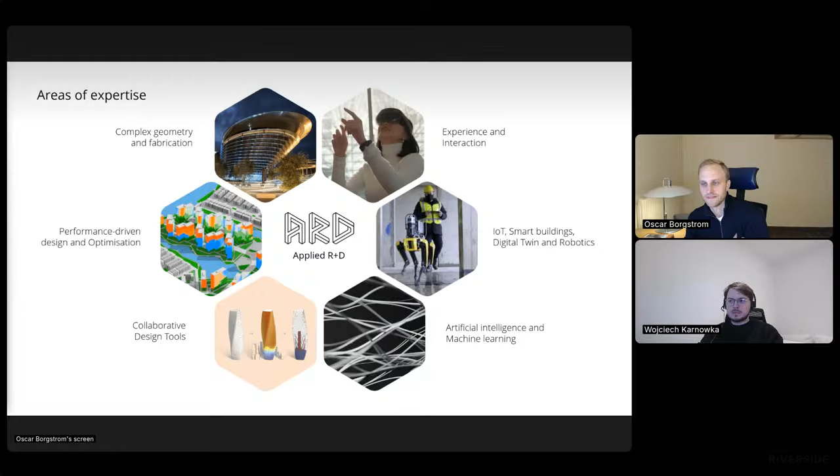So there's complex geometry and fabrication, which is the bread and butter of what we do. And then there's more experience and interaction and VR stuff. And then there's IoT and smart buildings, post-occupancy, digital twins, stuff like that. There's artificial intelligence and machine learning, obviously. There's collaborative design tools, but also how you make different groups collaborate better. And then there's the performance-driven design and optimization area. And that's the area in which Cyclops obviously sits. So there will be a lot of focus on measuring performance in relation to design.

Within this area, we have a few different tools. So traditional workflows usually involve a lot of stakeholders, and that can create quite delayed feedback loops when you're designing. And that is part of the reason why we develop these different tools, to basically shorten that time span, but also give more power to the designer so that they can develop this intuition of how their designs perform, and how they can make informed decisions quickly and effectively.

And while black box machine learning or AI models are all the rage these days, in some contexts like this one, fast and analytical and physics-based usually wins. Or I would say basically always wins, as long as they are within the relevant performance speed. Okay, I will hand over to Wojciech, who will talk a little bit more about the background of Cyclops.

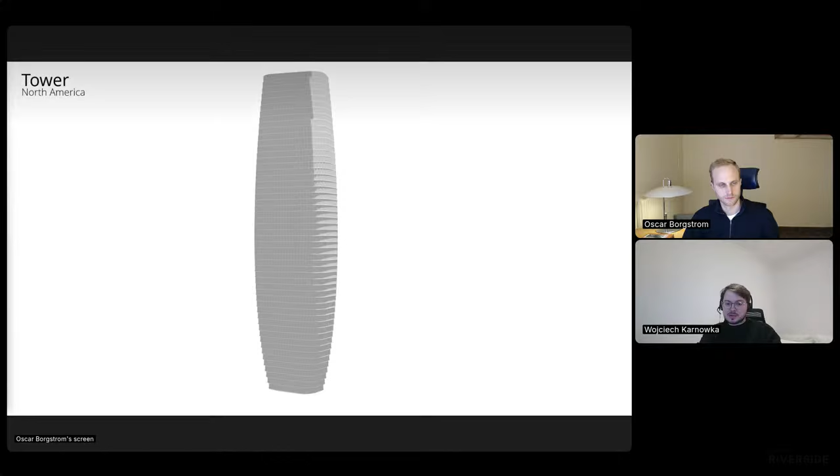We will start at the scale of the facade. Now, as you know, most of the work in our industry is confidential. So instead of showing you the actual project, we're bringing a kind of a dummy tower or generic tower to illustrate the process without showing too many details. Now we were asked to help and manage the direct irradiance on the facade. So we designed a system of horizontal and vertical shading louvers.

Now, traditionally, shading optimization relies on evolutionary algorithms or other heuristic methods. This is to reduce the computation time by just efficiently sampling the solution space. Now, with Cyclops, thanks to the speed and scalability that we already started talking about, we can just run a brute force evaluation of the entire solution space. So we test every combination of horizontal and vertical louvers per facade orientation for east, west, north, and south, and that's done on a laptop in 10 minutes.

Now, another not so specific building in Asia where we extensively used Cyclops for form finding at early design stage. We began by extruding the sides to the maximum buildable envelope, and that was 120 meters, and then we ran a sunlight obstruction analysis to assess the impact of this envelope on the adjacent school. The voxels with the greatest negative impact are then removed, and then we evaluate the impact of the resulting massing on nearby residential buildings. We again redistribute the voxels to minimize the view obstruction while maximizing our own views.

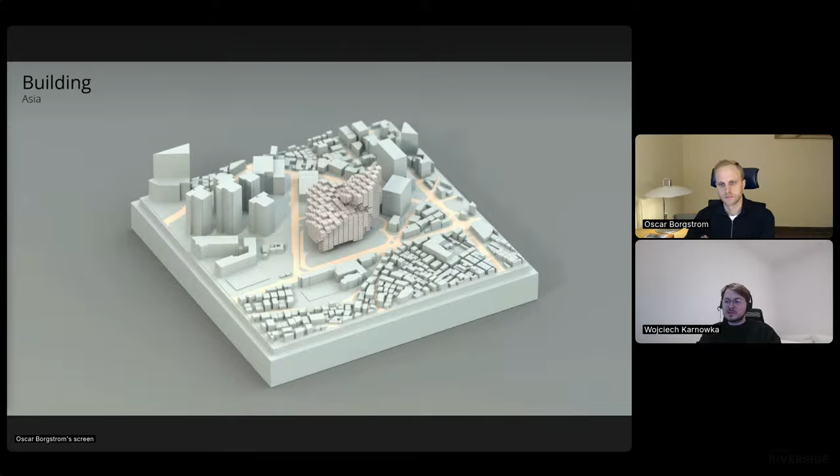So the voxelized shape can then be further rationalized for public space, for connectivity and internal daylight. And this becomes a sort of a reference for the envelope that the designer can then work with. Here you can see this envelope.

And finally, an example at the urban scale. This is a study for Guangming Hub in China, where the goal was to develop a layout that optimized for connectivity between the neighborhoods, views towards the central hill, daylight potential, and the total floor area. So we could have spent months creating and analyzing thousands of these options to find the best performing ones. But instead, we feed the requirements and the design rules to the computer and allow it to do the heavy lifting for us. The genetic algorithm generates and evaluates thousands of options and evolves the better performing ones.

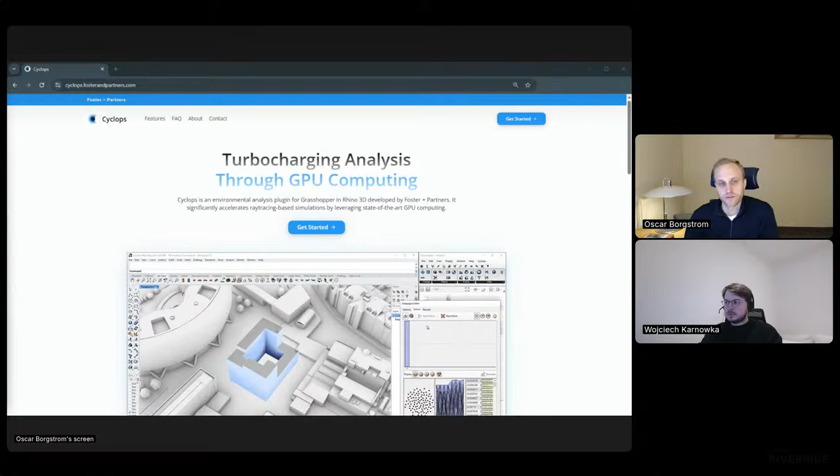The released package includes a few different features for things like radiation and daylight, sunlight hours, as well as some quite bespoke ones like the sunlight obstruction that Wojciech has been talking about. Cyclops is a Grasshopper plugin, and therefore it fits into most Grasshopper-based workflows. And it really brings this power of the GPU directly into the Grasshopper canvas.

So the benefits of using Cyclops are, obviously, as we described already, the speed at which it can run, but also the scale it can run. Not only the scale of the analyses, as in more samples, but also the scale of the context models that the software can handle. And then obviously this integration into Grasshopper, which allows for highly bespoke workflows that run analysis where the buildings often are designed.

So we'll take this one as an example. This is a real-time model in New York, where we're modifying a massing and updating the analysis for each frame, giving direct feedback on the performance. So each time you move this little arrow, the analysis recomputes.

To give some background on how this runs, the façade is sampled with an evenly distributed grid, totaling around 1,700 analysis points. Each point is then sampled 65,000 times across the dome, meaning that on every iteration we're tracing over 100 million rays, using a context model with over a million mesh faces. All of this runs at 40 milliseconds to give an update frequency of 25 frames per second, and thereby the real-time analysis, as you saw in that GIF.

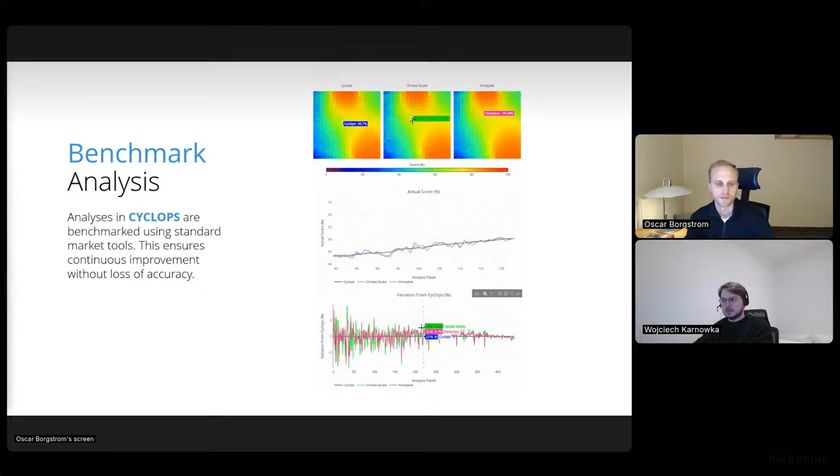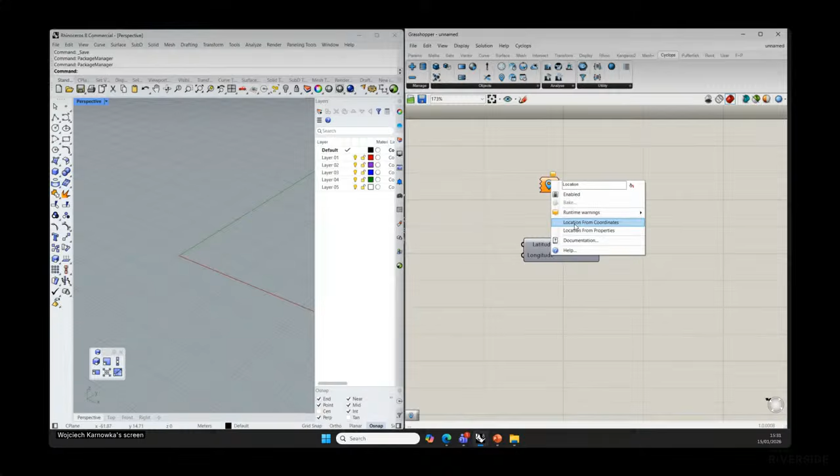So some of you might have been surprised, because usually when we pick a component in Grasshopper, we would just expect to see the component right away. Now, some of the components have multiple ways in which they can be created, for example, like this location component. So the first time you drop it on the canvas, you actually don't see any inputs or outputs. You would need to right click and then pick one of the methods in which that particular component can be created. And we will see in action how this is relevant with some of the analysis in a second. But this is just to explain if any of you get confused.

So that's our documentation. The next important aspect is the tutorial files item. So together with Cyclops, we ship a number of tutorial files that show how to use all the available analyses. So we have examples like cumulative radiation, daylight autonomy. We also explain some of the conventions, such as custom data or multiple scenes. Now we'll go through a lot of these principles throughout the workshop. But if you're interested, you can just have a look yourself and see the minimal viable setup that you need to have in order to run any of these analyses.

But as was mentioned at the beginning, today we will build the workflows from scratch. That also includes a little Rhino model that we will build, just to make sure that everyone is on the same page and that we can start from the basics. Is there anything, Oscar, that you think is worth adding before we start building? No, I mean, let's go. Let's go. Yeah. Okay. Cool.

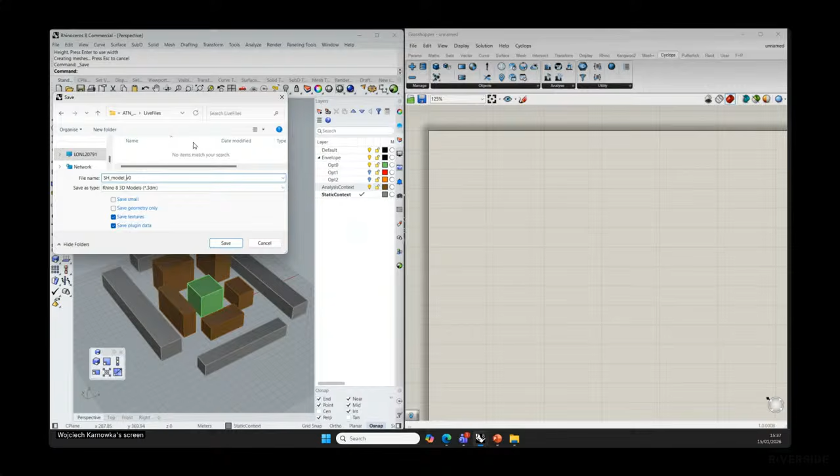So let's just make that a little bit darker, and maybe our analysis context can be just like that in this brown. Perfect. Okay, so these I believe are all the ingredients we need for the moment. So I will just save this file, and I will call it sunlight hours model, just to make sure we don't lose any progress. And I will also do the same here. Perfect.

So now I have an empty Grasshopper file, and the first thing we need to do is we need to reference some of this context so that we can get access to it. I will also use Bifocals. It's a plugin that, as we drop any of the components, since I'll be using icons, will give us a description of what the component is. Do I need anything else? I think this is a good place to start in Grasshopper.

So the first component that I will drop on the canvas that will do something is actually the Query Model Objects. This is the new component in Rhino 8 that allows us quite easily to reference active geometry from the Rhino document. For now, I will just reference the geometry that belongs to the envelope layer. I'm not going to get into the details. There's quite a lot of material online, but these new components have quite advanced filtering capabilities, so that we can extract exactly the geometry that's required.

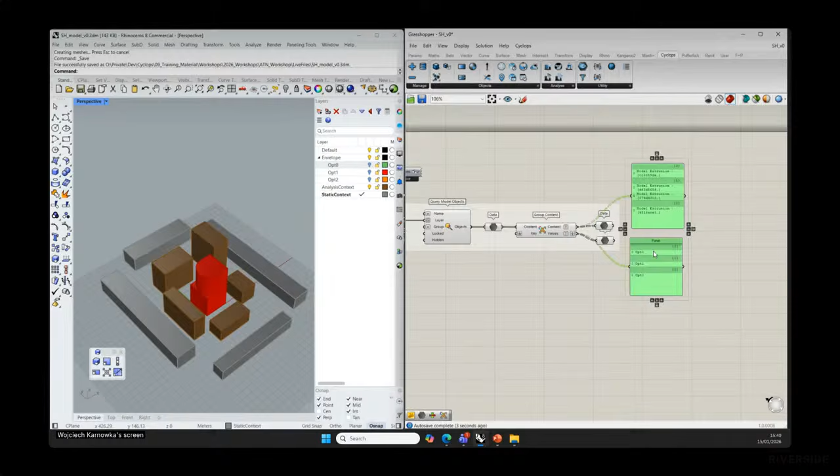What I also like to do to keep the scripts clean is keep them in separate groups so that we know that this is a distinct functionality. Now I will also do the same for the rest of the geometry. So we will do one for analysis context, and I will do one for the static context.

Perfect. So now I have my geometry reference, right? My static context, my active context or analysis context, and my proposed geometry. Fantastic. So let's just move it all to the side. And now let's start building on top of this.

As I said, we will run the sunlight hours analysis, but we will run the sunlight analysis not on our own proposed geometry, but actually on these adjacent buildings. This is to help us understand what is the impact of any of these massing forms on the adjacent buildings.

Okay, so the first thing we need to do is, since we already have the geometry reference, we need to subdivide this building into a grid of points, analysis points, that we will be able to test, right? So there's a million ways of doing it. I'm sure that if Oscar was running this part, he would have done that differently.

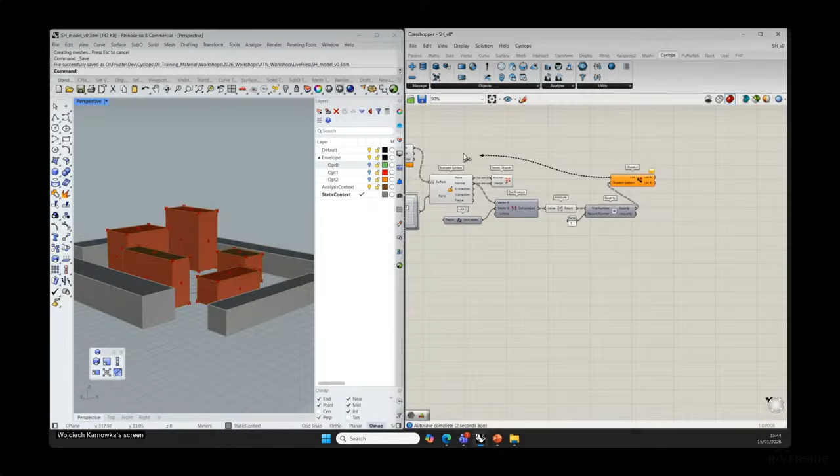So now I have access to my horizontal surfaces, but actually what I want are the vertical ones, right? So if I now hide all my geometry, and for the time being also hide all the geometry from Rhino, I have my vertical surfaces. This is a good start. Now we need to think about how we're going to subdivide them.

We don't really care about the data structure here, so we can just flatten the surfaces, and we can now start subdividing them, right? So we're going to start with a mesh surface component, which will allow us to take those faces and turn them into a mesh. If I now press Control M, I should be able to see the subdivision. So the default subdivision looks like that. As a default, it just hard codes constant U and V count. We don't want that, right?

We imagine this is a kind of proxy for some sort of a facade. So we want to now subdivide the facade into a number of panels. We can think of it as almost like maybe a curtain wall. So let's get the dimensions. First, let's get the division component, and we'll do that separately for U and V. And I will also get something like a slider between 0 and 12.

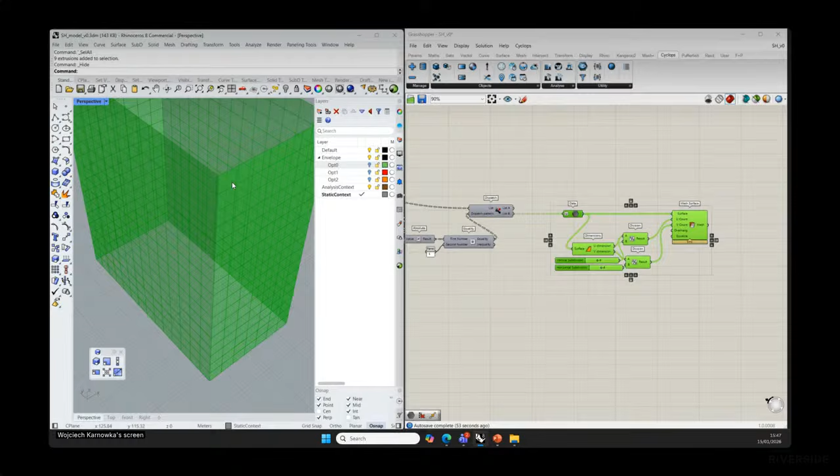Fantastic. Now, as I said, we'll be using the geometry of our adjacent buildings to run the analysis, and we will be using these panels to visualize our results and to define the position of our analysis points. That means we cannot simply draw the panels or sample the points exactly on the geometry, as geometrically it would be impossible to define, or the analysis point would be clashing with the geometry that we're using for the analysis. So we need to offset our analysis points, and the panels will be visualized slightly off the facade. So this is again something that you would have done a million times using Grasshopper.

I will just reuse the evaluate surface component. I will use the normal, but I will unitize it. And that means that now all my vectors are only 1 unit long, in this instance 1 meter long. And I will also multiply that vector by some very small amount. So I can, for example, do something like 5 centimeters. Okay, so now this is a vector that moves my base surfaces from the facade by 5 centimeters, right?

So I can take the original surfaces and move them just slightly away so that you can see the original geometry. So when we visualize our results and when we test our points, they're not directly on the surface, but actually slightly away. And this is a very common practice in environmental analysis, so it should be fairly easy for those of you that have run environmental analysis before.

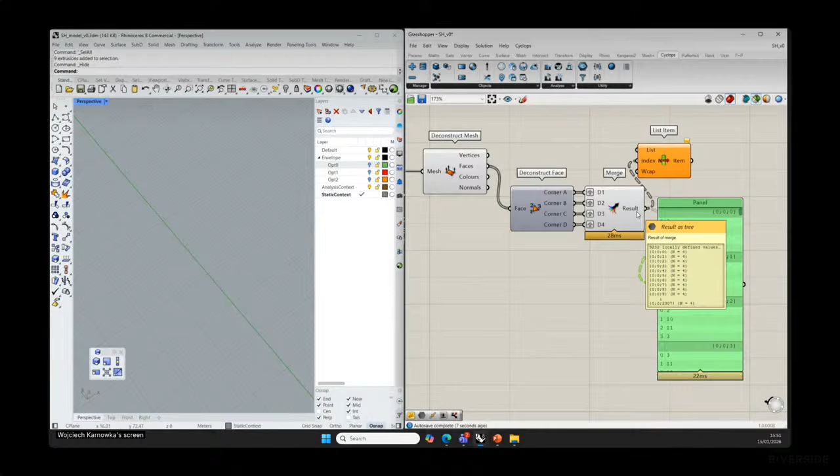show it. So here we are running the deconstruct faces. For each of the faces, we get the indices. Those indices, for example for item index 0, 0891, describe which of the vertices of the original mesh make up the face. So if I now go with list item, and I obviously have to graft my inputs, instead of a single flattened list I'll get a tree where each branch defines the indices of the original vertices that will make each of our individual meshes. So we now get a tree where each branch contains 4 points, because we're dealing with quads. The mesh is defined by four vertices.

Great. Now to build the actual mesh, we will need construct mesh. We know the vertices are in the correct order, so we only have to plug the selected vertices into construct mesh's vertices input. So to illustrate what we've done, instead of originally a joined mesh, we now have individual panels where each panel is really just a quad with 4 vertices. That's great. I can simplify my tree here.

Fantastic. Now let's try and extract the analysis point for each of the panels, so that we can define a point in which the analysis will be run or sampled. The first thing, we can maybe not even simplify, but just flatten, as we really just want access to each of these meshes. We can then use a face normals component, which gives us a center for each of the panels and also a normal. And we will also group it here and call it facade panels. So this is now the geometry that we can very easily visualize, for example, colors on.

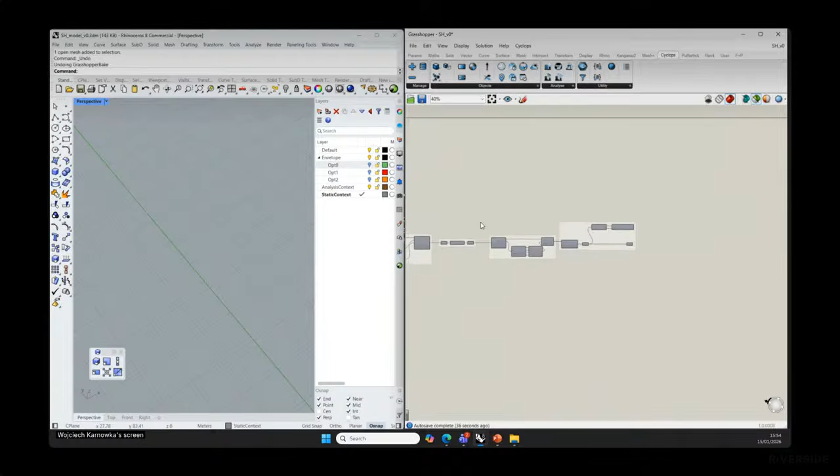So we now need to deal with the context that we left here. Maybe I'll move this to the bottom, and let's think about how can we bring this context and prepare it for analysis. So the first useful thing that Cyclops lets us do is this get clean mesh component. So this is a component that tries, with as little effort as possible, to create a clean mesh representation of the input geometry. So for BREPs and SubDs, it will try to get the display mesh that is already automatically generated by Rhino.

And this replaces the need of generating the new mesh every time the script runs. This will also help us when we have invalid meshes or nulls, just to make sure that we have a nice and clean mesh. Okay, so I can plug this get clean mesh into my static context, and I will also do the same for the proposed geometry. Now you can see here that this is actually the place where we care about the data structure, so I'm not going to flatten it. I'm just going to keep it as it is.

And now we will also need the geometry on which basis we build our analysis panels. We will also have to include it in the analysis. So I'll also get the clean mesh here, so that we can have this added. Now the Cyclops specific part, right? So in Cyclops, you can also read about this in documentation. We need to wrap the geometry into a geometry object, which is our basic primitive in the three-dimensional scene. And it wraps the data so that the rays in Cyclops can interact with it.

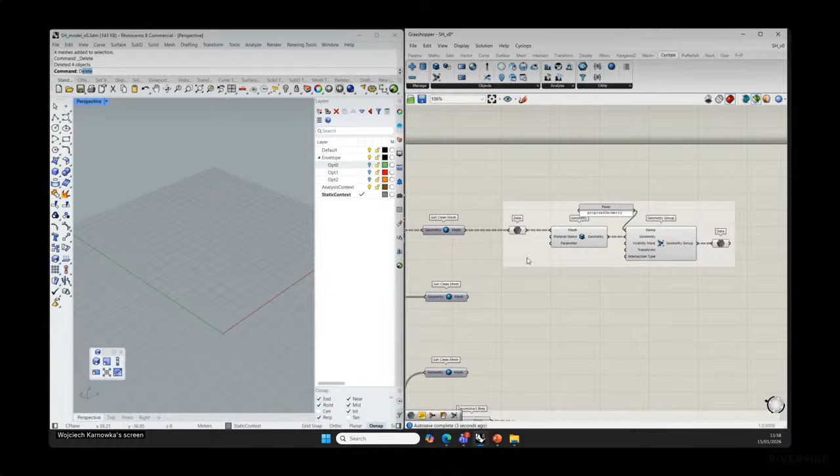Perfect. So this is our little component that turns our Rhino Grasshopper native geometry into Cyclops geometry, and I will copy and do exactly the same to the rest of the context. So here I will actually bring both of those together, and I will just plug the mesh. But as I said, let's be careful about the naming of our geometry groups, and I'll call this group context. Okay, fantastic. So we're getting there. We're not too far.

We now have the geometry and our analysis points, and now we need to look into the actual analysis. So here under Analyze, we can see the Sunlight Hours analysis, which is the component we'll be using today. Once I drop it on the canvas, we can see that there are still a couple of missing inputs that we will need to provide.

So first, I'd like to start by adding a Boolean toggle so that run is set to false. If I set it to true, I can see that we need some scene objects, or a scene, right? So first I'll drag these guys over so that it's easier to see, and I'll call this proposed geometry. And I'll drag these guys and call it context so that we know what's happening over here. Okay, perfect.

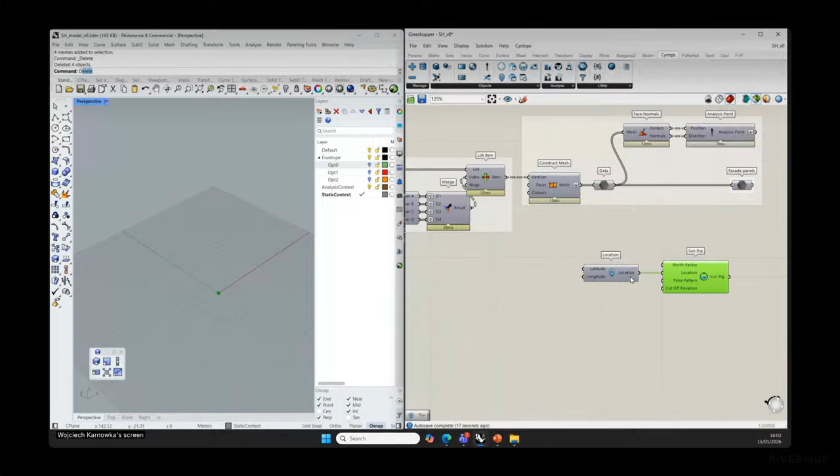As I said, we also need a time series or time pattern, which defines specific points in time throughout the year and is used to sample time-based data like weather when creating sky series. We'll look into that in a second. But to keep things simple, let's create a time pattern. There are a couple of ways to create it. We will use From Schedule, which lets us define the time pattern very simply for months and days.

We will run this analysis, to keep it simple, for the 21st of March. And we'll do it for, let's say, 10 hours. Oh, actually, instead of 10, let's do it for the entire day, so we have 24 hours in that time pattern. Perfect. So I will plug the time pattern into time pattern, and I've now created my Cyclops object.

It's called sunrig. This component already gives us a preview of the sunrig, but it's quite small, and we don't have access to any of the properties. So there's a second method, Sunrig Geometry, which I can use to preview and extract some of the geometry and parameters from the sunrig. If you're creating a diagram, for example, this is quite helpful. It's project and unit specific, but let's make it slightly bigger so that when previewing the mesh we can see what's happening.

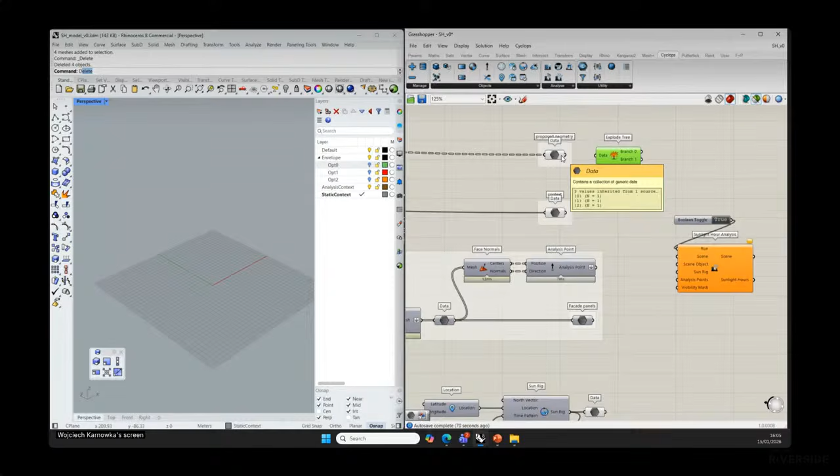So I believe we now have all the ingredients we need. The only problem, which we can skip for now, is that we have a single object as context, and this proposed geometry that has 3 different paths. But let's just try and see some geometry. I'll extract one of our proposed geometries, in this instance option 1, and plug it directly into our scene. I also need a sunrig and analysis points, and I also have to flatten the objects here.

So the analysis has run already. It took just 10 milliseconds, and you can see that for each of the analysis points we now have a value, the possible sunlight hours for each of these analysis points. So let's quickly, before we add any complexity, build a quick visualization pipeline so we can have our facade panels. We can do something like a gradient.

I would just use a gradient like that, and I can now use the sunlight hours results as a parameter. And just for the purposes of this, I know that this is a value somewhere between 0 and 12. So let's just set the upper value as 12, the lower value as 0.

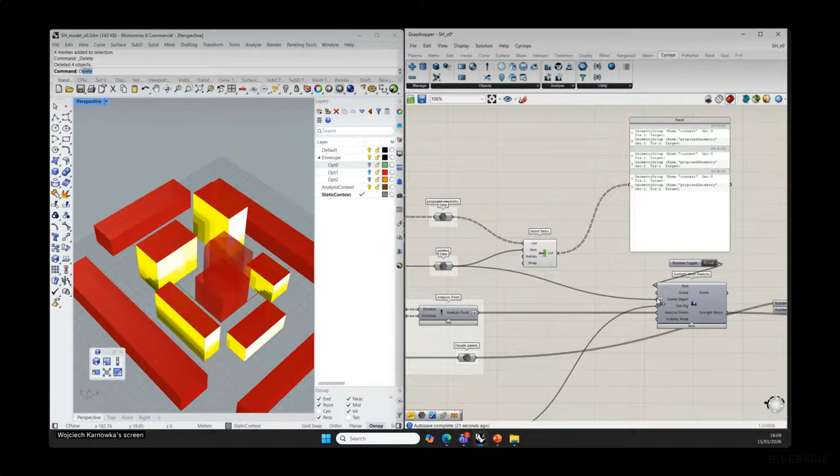Fantastic. So now instead of just picking one of the options and plugging the context separately, I can just plug an entire tree into the analysis, and I now get the results split into a tree. So if you remember, we've already showed it before. Each of these branches corresponds to one of those child layers.

That's fantastic. And now we will need to build a little bit more just to be able to distinguish between the options. So let's build something. There's again a million ways of doing that, but let's just do something like a tree statistics, so that we get access to all the paths that exist. I use the list item to pick up one of these paths, and I know it's 0 to 2. Okay, perfect. So now I just very simply extract the results for one of the paths. So this could be a path 0, 1, and 2. So very standard practice again.

Now I can just plug these results over here. It would be quite nice if I could see actually the massing that affects our adjacent buildings. So I can use the same path now, because I know that here at the very beginning we had a nice and clean mesh. So right now I'm just using the same path to pick the geometry, and I can see the preview of it as I go through my paths. That's great. Let's maybe build a little custom preview.

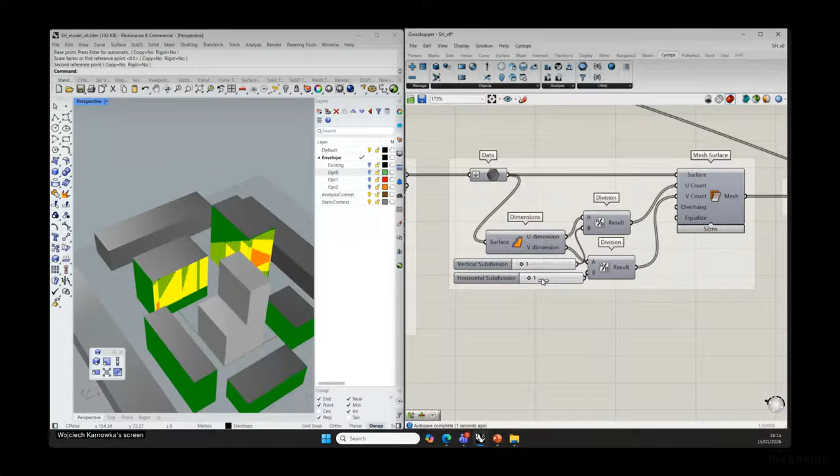Let's see if we could maybe get a higher density. Okay, maybe I went a little bit too far. Okay, but this should give us an idea of how we would find the differences in the impact between the massings. I think maybe this is a good place to pause. Oscar, is there anything you would like to add?

I mean, you can try and increase the subdivision of the time pattern just to show, because now you're just sampling once per hour, right? Right. Yep. Okay, perfect. Yes, let's do that. I will just make the grid a little bit larger. So let's come back to our original grid, and now we can. I haven't actually mentioned that. So here the number of time steps per hour, right?

So right now, in this period of 24 hours, we're sampling just 1 time per hour, but it could very well be, let's say, 4 times, 6 times, right? Yeah. So let's just come back. So now you can see that this gradient is a lot smoother. Yeah. Okay. It's another thing that I thought of.

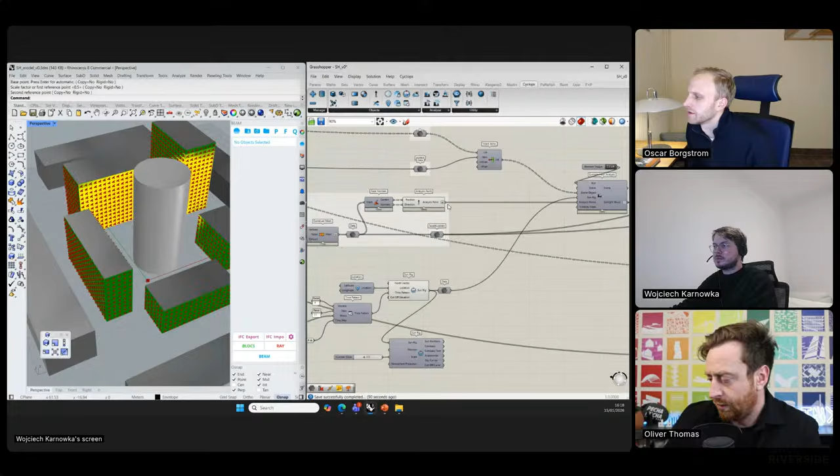There's a few quite high level ones. Some people at the beginning were asking, does this work in Rhino 6 and things like that. I think there's someone on a Mac that's asking, does it work in Parallels or whatever it is on a Mac? Some boilerplate questions like that. Yeah, I mean, so with Rhino 6, we haven't actually tried. I can't actually answer that. I would say you need to test, but we can't guarantee anything. People got to experiment and see what happens.

And it's actually the same with Parallels. We haven't tested with Parallels, but if you have an old MacBook, not with an M GPU, but with an NVIDIA GPU, then in Parallels you would have the NVIDIA driver. So potentially, because you would be running the Windows version of Rhino as well.

So yeah, it might work, but as I said, we haven't tested that, so I can't guarantee. It gets complicated, so you guys just got to test it and see what happens. The requirement comes from us using NVIDIA-specific libraries to do the ray tracing and use all the RTX hardware acceleration and everything. And that's why we need to be in that environment.

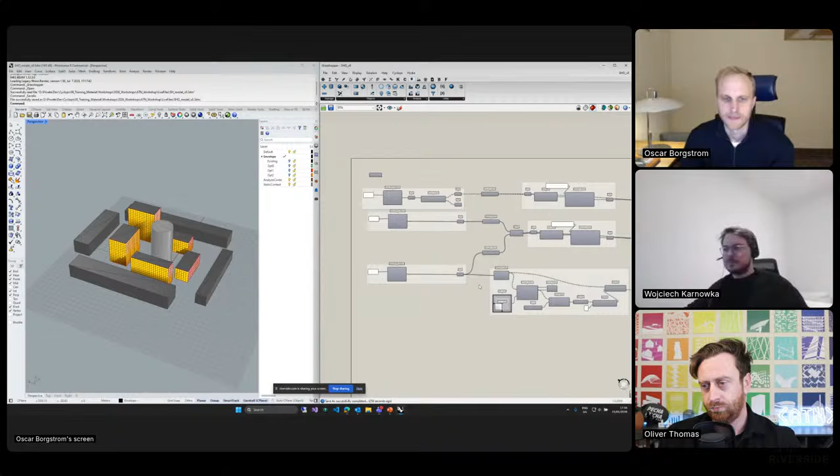Then this is obviously a bit involved because we're running analysis on the context rather than on the actual option, because we want to know how much the option impacts the context. Sometimes I guess you would run it on the actual option, but this is what we're showing here now.

We then subdivide the context into little panels, and we create these points on which we measure the amount of sunlight hours. We prepare the geometry for Cyclops, and then we decide what amount of time or when in the year and at which location we want to actually evaluate the sunlight. We run the analysis and we display the results. That's what we've done so far, and we measured the amount of sunlight hours on the facade of the context

buildings. Now we are going to go a bit deeper, and we're going to use a very bespoke Cyclops analysis called sunlight obstruction. And we're going to use it to basically evaluate which part of the option, so which part of the geometry that we're proposing for our development, has the highest impact.

I'll see if I can find this in the documentation. So if I go to analyze, this is a bit slow. Yeah, analyze and then sunlight obstruction. And so you can see an example where we're evaluating this neighboring building, just like we're doing here, and we're basically subdividing our option into voxels, and we're seeing which voxels have the biggest impact.

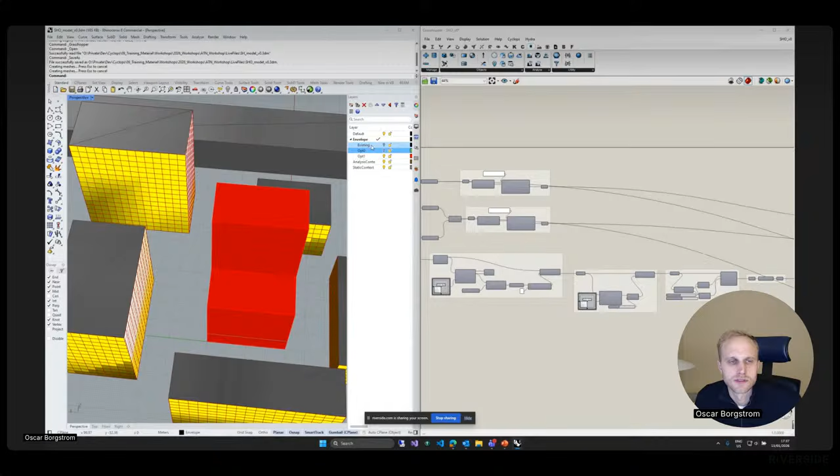So I will go here and delete option 2, delete option 0, and delete existing. Yeah, so we'll stick with this option. Okay, we still keep the analysis context because this is still the context that we want to evaluate. This is the context that we want to measure the impact upon.

Okay, and then we have the static context, which we're not using to analyze, but it is in the scene in such a way that it will impact the analysis. In this case, I guess it won't actually, because it's outside of the relevant geometry, but anyway, we keep it in there. So for this analysis, we keep the envelope here. Obviously, there is only one envelope, so it's not super relevant, but we're getting the meshes, which is relevant.

But now we want to voxelize this geometry, right? Because we want to have a way to see which part is impacting. The way the analysis works is that you have your analysis point, you check the direction to the sun, and you see, does this travel through any of the obstruction geometries that I have in my scene. So I'll use this model extrusion that we have. Let's maybe go here. I'm gonna just hide these.

Actually, we might do some cleanup here because we don't need all of this. We will need the sun rig. We will not need this analysis. Okay. And we won't be displaying any differences in this case. Okay, otherwise I think we can stay here to start with. So first off with the voxelization, this can probably be done in a lot of ways in different plugins, but I'll just show a way to do this in vanilla Grasshopper.

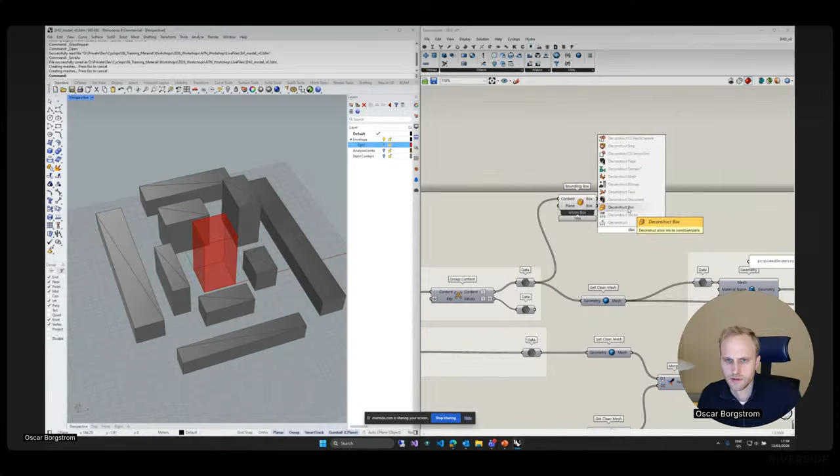So we'll do a bounding box of the geometry, and we'll do it as a union box. Okay, then we get the box properties. Oh, sorry. It's called deconstruct box. There you go. And we basically get the domain. So what we want to do is create little cubes or voxels, and we want to use the domains to create those voxels.

So we have the domains x 0 to 40, 0 to 40, 0 to 80 in Z. And then maybe in Z we can create a separate value for a grid. So we can use a grid of 9 meters maybe for the horizontal grid. And then vertical, maybe a reasonable height, 4 meters. Is that a reasonable floor height? Okay. And then we divide the domains.

So we want to split these into subdomains so that we can say the first voxel goes from 0 to 4, the second voxel goes from 4 to 8, and so on. An easy way to do that is to turn these into numbers. If you plug a domain into a number, it will give you the size of that domain. So if we do it for x to start with, we plug the number into A here, and because we have our horizontal grid, which is another number, we can call this division.

And the total size. Okay. That basically says here that we can fit 4.4. This is just approximate, so we'll just use that. So we turn that into an integer. We probably round down to 4. We have our domain, which is there actually. Can use that as an input instead. Domain. I'm just doing this so I can then cluster this and kind of copy it for the other domains as well.

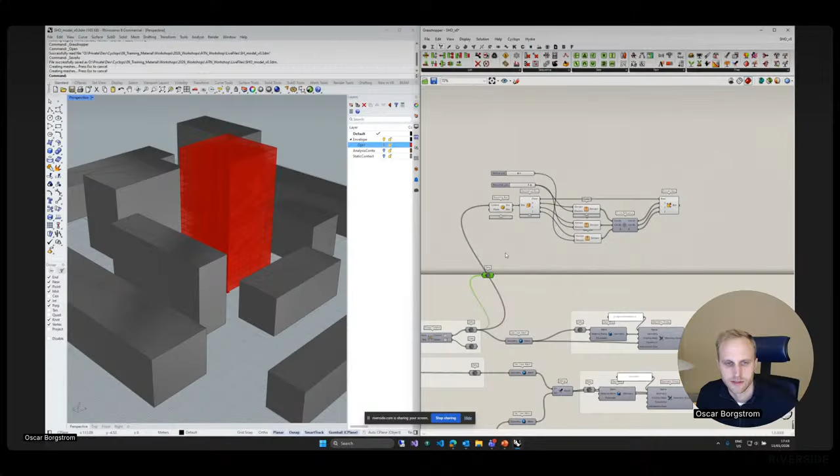So you can see here there is 0 to 10 and 0 to 10 continuously 320 times. We have 320 values for Y, and we have 320 values for Z. And now if I plug in list A, list B, and list C, I have filled my whole tower with boxes. Okay? Or my whole bounding box with boxes, rather. Then we can just use, because actually our geometry isn't that, right? It is a bit more advanced.

So let's check which of these are actually inside our massing. So I take the box, I just do one of these evaluate, which will give basically the center point of the bounding box. So I get the center point of each box. I go to analysis under surface and I just check point in B reps. I plug in my points, and here, right, I have my B reps. Okay, this just gives me a boolean if it's inside or not. I can dispatch my boxes with the inside, and then if you look at the data, you can see these are inside and these are outside, right? So we're only really interested in the boxes that are inside; this is like an approximation of our massing using boxes. Okay, hope that was clear.

Now we basically need to turn this into something called obstruction geometry in Cyclops. So I go under Cyclops here, and then I turn it into geometry. I plug it into a geometry group here, but then you see there's this thing called intersection type, and this basically decides if it's target or if it's obstruction. If it's target, we basically treat it as geometry which we want to count obstruction for, whereas if it's obstruction it is geometry which will be in the way, not transparent, so a sun ray will not be able to travel through it, and we won't be checking how much it actually impacts the analysis results. Okay, let's call this voxels.

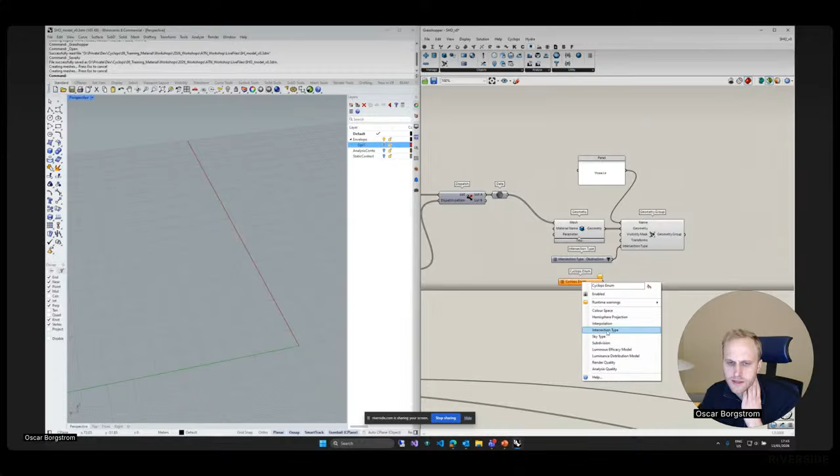There we go, and then this is now set to target, but for every one of these enum inputs, you can always right-click the component and click generate missing enum inputs, and that will basically give you the relevant enum. And here I can now change this to obstruction. You can do this in different ways. There is also the enum component, and this one lets you right-click and choose which type of enum you want to create. But that takes a bit more time, so it's very neat just to generate missing enum here. Okay, so that's the geometry group for the voxels.

We have the geometry group already for our context. Now we just need to make sure that the context is actually target intersection type, right? We won't be using the proposed geometry because that would obviously be in the way of our voxels. So I will basically just remove that, and we don't really want this stuff actually. Okay, sorry, I'll keep the context one, but I remove this, and we can copy this group. Can we do that? Yeah. And we can name that voxels.

Okay, and we plug in the geometry group with the voxels there. We don't want to see that geometry group. And we want to group the thing that voxelizes. Okay, seems like I have black instead of white. Let's just make it white instead. Cool, and group that. Okay, so we created our voxels.

I will actually delete this because we don't need it. And we don't need this mesh. Still need our context as we said. Okay, so now we go in here and we look at the sunlight obstruction analysis. Very similar to the sunlight analysis. Pretty much exactly the same inputs.

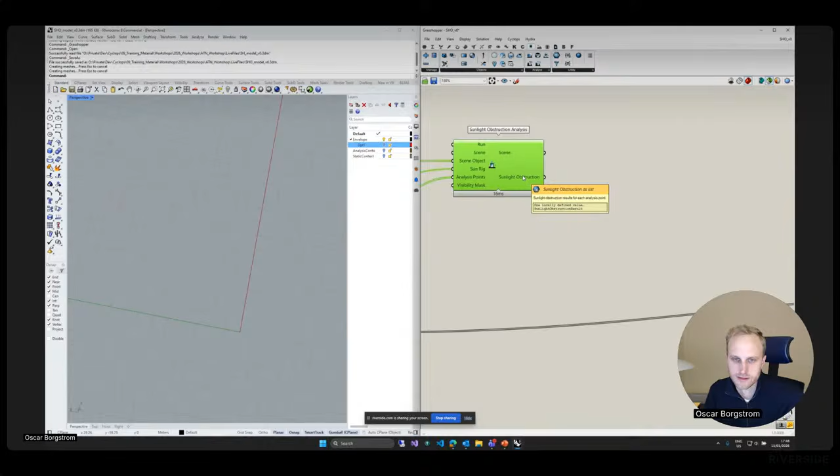So that runs. Wojciech likes to put in a toggle here. Usually you don't need to, because usually the analysis is not actually the thing that takes the most time in the script, but as safety we can do that. Okay, and then you see we just get one object, sunlight obstruction result. And that is because these results are a little bit more complicated, so it's a bit hard to just flush them out in a data tree or in a list.

So instead, when we get an object like this, we need to use the component called filter results up here. So I'll drop that, and you can right click this and choose sunlight obstruction result. This is because in other versions of the plugin, there are more types of these results. But anyway, if I plug in now sunlight obstruction results here, you can see that it kind of changes. And now it allows me to basically choose which geometry group do I want to get the sunlight obstruction results for. Right, so I created one geometry group up here with the voxels called voxels.

But I could have another geometry group in the scene as well, measure the obstruction for that geometry group, and that way I can basically filter using this component which geometry group do I want the results for. But obviously now there's only one, so if I click add here, this works similarly to the enum. It will create that input. And you can see in this drop-down, voxels is the only option I can choose from.

And now the output will be the amount of hours total that each voxel obstructs sunlight hours. Okay, just to sanity check, 240 voxels, and it will be in the order that the list is obviously plugged in here. Right, for the first geometry here, you will have the first result here. Okay.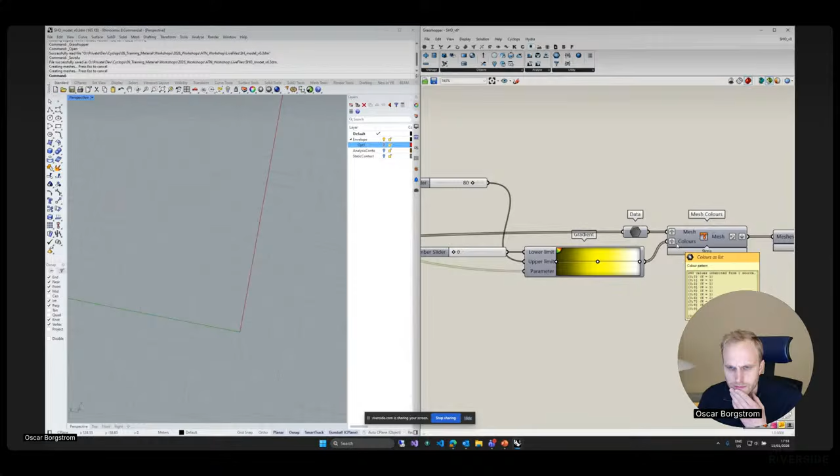And let's reuse some of Wojciech's analysis here, or display rather. We can just get the bounds here just to see. So the maximum is 80. I'll just plug in an 80 then to the upper limit. Okay, we're not going to do it per option here. Okay, so we plug in that, and then we're getting 240 colors, right? Because we have 240 voxels.

And now we don't really want to display this on the facade. We want to display this on the voxels, which we have up here. So we pull those down, and we plug those in here. And then we turn this off. And now we can see the voxels, right? And we can see basically, which is, I guess, naturally the ones that are kind of closest to the facades have the highest impact.

If I preview this, you kind of get the sun path in relation to that, and you can see that. Obviously, if the sun is coming from here, these geometries won't really shade much, because the sun that goes through those geometries will just hit the ground, while the geometries up here obviously shade like this geometry, right? It shades probably for the facade behind there from this sun position, but it also shades the facade here from this sun position, right? So they have a big impact, the ones that are white here. But actually, maybe it makes sense to just create the preset, which is green to red. Okay.

Then as a little filter here, you could maybe have a specific GFA that you're kind of allowed to build, as an example. So then we could maybe do a sort, and we could sort our voxels by the score that the voxel has. And then we know that the voxel here is now 9. We can actually take that number down.

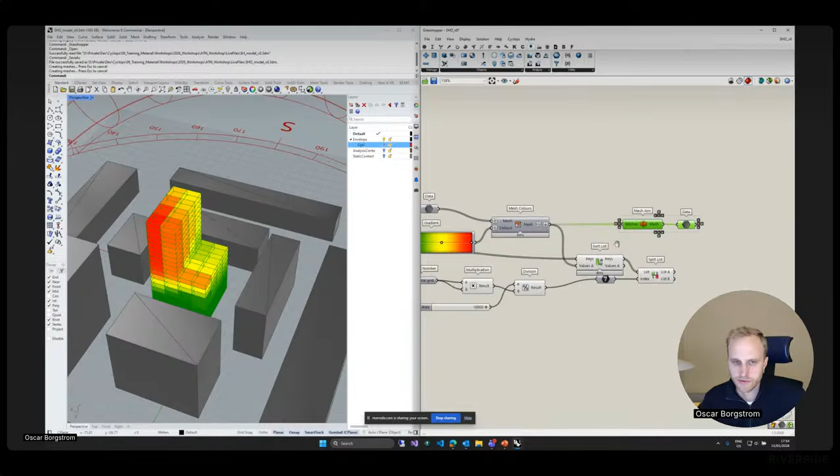Okay, and if we actually then just plug those, oh sorry, I plugged in the keys. We obviously want the values because they are the voxels, and they are already colored. So we just plug that in there. We preview off from this, preview off from this. We actually want list A, right, because we want the ones below. There we go.

Maybe I can set this to 20, sorry. Okay. Now we can kind of filter out how many voxels we want to be displaying or want to use. Obviously, it creates a bit of a gap, so this, as we've said before, is just kind of a guidance on how many voxels you should use.

We can see what happens then if, just as a test, I create a time pattern again. Instead of doing it for a specific day, maybe I want to check the whole year. That will obviously create a sun position for the whole year, right? And now 80 doesn't make sense. Let's get the bounds again just to see what the max is, 21,000. Actually, I'm just gonna deconstruct that domain and just make the display dynamic. Okay.

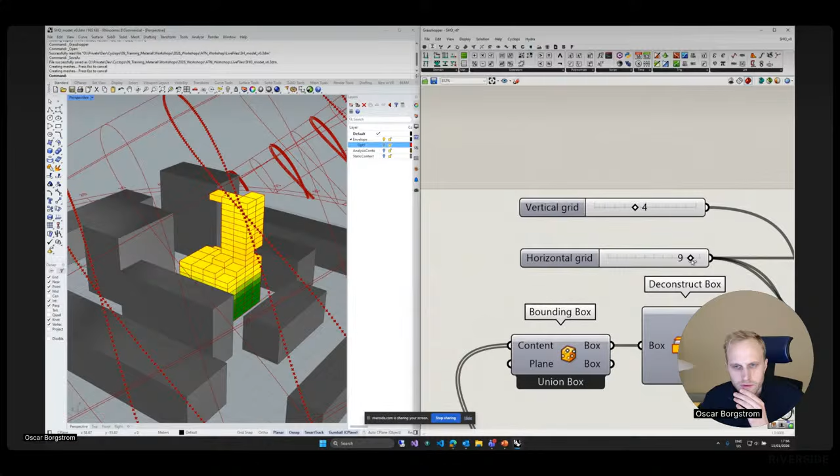So now we're using the impact of the whole year instead. Creates a bit of a funny look here, but that's usually the case. This is guidance, as I said. Okay, I hope that was clear. I can also divide this into something smaller just to show some more performance.

So now still the analysis runs on my laptop here with an A4000 GPU, I think, for 2,600 voxels and 4,400 sunlight hours, 2,300 points that we're checking against. Yeah, I hope that was kind of clear.

Let's see if there's any concepts we can maybe talk about. So we talked about those, we talked about that. So there's one thing called custom data and get property value, which can be quite interesting. So on each Cyclops object, we basically attach a dictionary that can hold custom data. And that allows you to basically send information with Cyclops objects.

It's similar to what's now been introduced in Rhino, where you can apply key value pairs, and in Rhino you can also filter by key value pairs. You can use that to basically get and set custom data on an object. So if I put this here, you can see I input a Cyclops object, which is, for example, my geometry group, right? And I say the name of the key. What can we attach here?

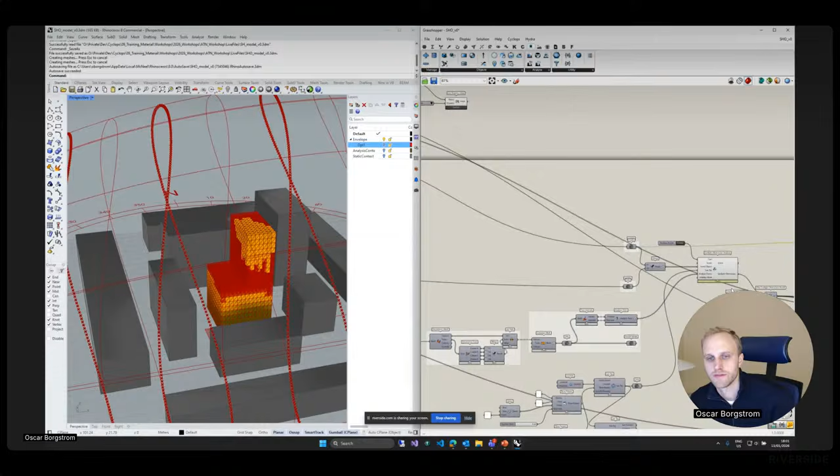This is maybe not the most efficient way to do this, or the best example of where this is useful, but still this is a way to retrieve the data that you have inputted somewhere else in the script. So here I now have my meshes for my voxels, right? And if I flatten this, I can obviously use it here. Preview. And I get the same thing. And I didn't need to output the boxes up here.

Okay, we'll wait a little bit with the scenes. Let's see if there's anything down here which would be good to go through. So yeah, we can go through the time patterns. There's quite a few ways to create these, and quite a few more ways of creating time patterns will be released in the next version. But by default, it creates sampling within the hour.

Does that make sense? So what you see here, this one is not the one we're displaying, this one, right? Here we have a sampling of once per hour, meaning that if you want to evaluate how many hours you're getting sunlight between 12 and 2, let's say, you need to have 2 samples because you have 2 hours that you're covering. So then we sample at 12:30 and 1:30. It wouldn't really make sense to sample at 12 and 1 because that would not be an accurate representation of the time between 12 and 2. So that's why you're seeing these samples every half an hour.

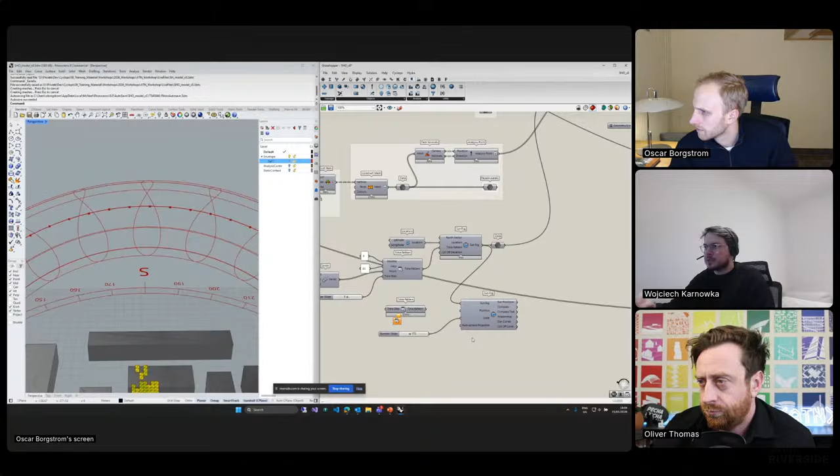Okay, I think we're kind of finished here, and we can jump into some radiation. I think, Oscar, if you want to do the scene now, because we will have to use it in the radiation. I can go for it as well, but okay, sure, you're describing some of this, yeah, do that. Yeah.

Okay, so in this, it's almost better to do it actually in the previous script. Mm-hmm. Don't you think? I will save this and save this.

Sorry, I'm working from a server, so it's a little bit slow. Or it's very slow. Maybe it's the streaming that takes all the time.

There we go. Okay, file. We go back to the sunlight.

And here we go back to the sunlight. Okay, so now we're back in the sunlight hour script. And as Wojciech did before, he basically created a branch for each option, and then he inserts the context, right? Because this runs by branch. So for each branch, we run an analysis, and each time we basically upload all the geometry to the GPU, we run the analysis, and then we remove everything.

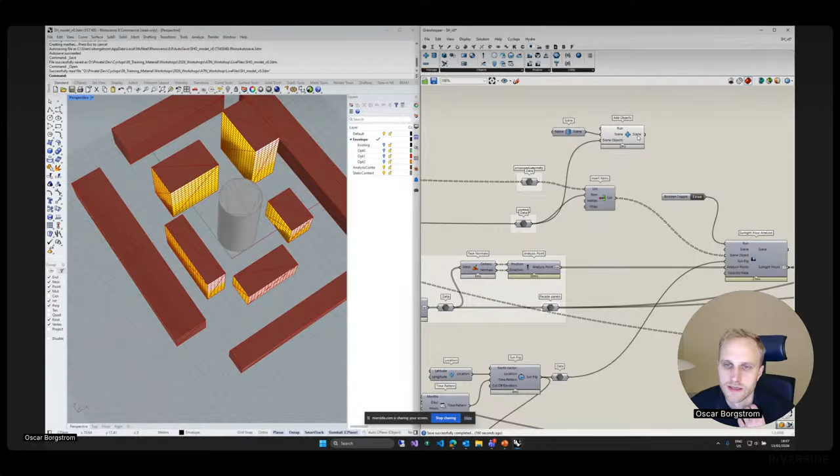And the scene, you basically create one by dropping the scene component on the canvas, okay? And this has now created basically a static state on the GPU onto which we can add things, remove things, and run analysis, okay? And then I can use an add object onto the scene. So I take the scene, and now what is static is my context, so I plug that in here. So now I have a scene that contains only the context.

And now I can run analysis on the scene, and I don't really need to then input the context again to that scene, right? So I basically delete this component, and then I will plug in the proposed geometry in my scene objects and the scene into the scene. Okay. It sounds maybe very clear. I hope so. It can get very complicated.

Oscar, you can also just show how in the same scene we can run multiple geometry groups and kind of how that relates to their names. Yeah. So what Wojciech was pointing out before, it's very important to name your geometry groups, because now instead of removing the scene between each analysis, we're actually keeping the same scene. We're basically adding new scene objects, right?

So for each branch here, we keep the scene static, and when we run the first branch, we add the things in the first branch to the scene, we run the analysis. And the things in the first branch will stay in the scene forever if they're not replaced or removed, right? So because we're creating here 4 different geometry groups, they all have the same name, and the name, as Wojciech said, is the unique identifier. So if you add a new geometry group to a scene which has the same name as one that already exists, it will replace it.

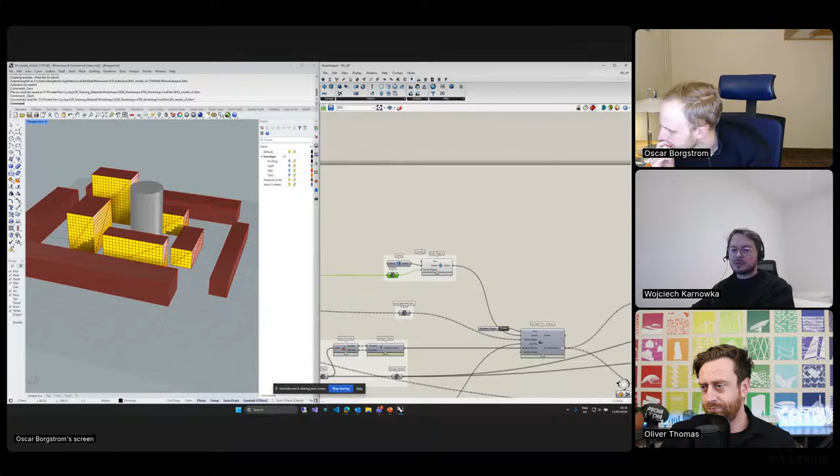So this is the example that we would normally run in a loop. I don't know if Oscar, you want to talk about it, but basically at each iteration stage, you would have to be adding just one voxel. Right. Yes, we've done a few analyses like this before, where you kind of step in a way. I don't have that open anymore, but you basically create one voxel, and then you evaluate, and then you make that opaque, right?

It's not transparent anymore, and then you check, okay, of all the voxels that are on the same plane or possible to add, just stepping upwards, where should I add a new voxel in order to increase the obstruction? Yeah. It's very hard to actually explain this workflow, but there are iterative ways to kind of add voxels, because the problem here is that the voxels are transparent, right?

So a sun ray will affect all the voxels that it travels through. And that's why we're getting these kind of strange shapes, and sometimes there might be a voxel in the center that impacts the most because it sits in such a way that sunlight from a lot of directions travels through it. It doesn't mean that removing that voxel will remove the impact, because there might be other voxels that also shade the same sunlight, if that makes sense.

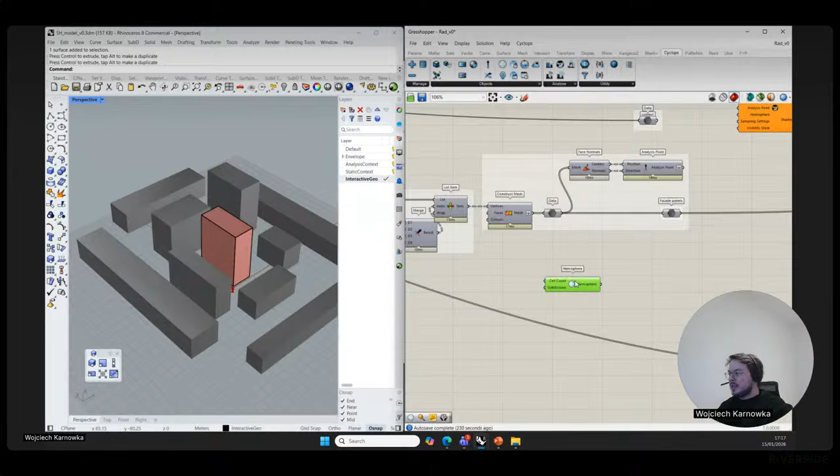And again, similar to Sunrig, we have two ways of creating it. We have the hemisphere and hemisphere mesh. Let's start with the hemisphere. And now, as I said, depending on the size of the plane, we can see its representation. Maybe just to make it a bit easier for us, I will immediately also bring up the hemisphere mesh so that we can scale it. We could do that with the plane, but because we're working with quite a big model, I just find it easier to scale this way.

Okay, amazing. So the hemisphere describes the subdivision of the dome into discrete patches, and it requires us to define a cell count and the type of subdivision. For the cell count, it's just a target number of cells that the dome should be subdivided into. And then the subdivision is, again, an enumerator. Quite common in environmental analysis is using the Reinhart-Tregenza sky division.

If we're interested in what any of that means, we can again go into the documentation. So in this instance, let's just go to the documentation here. Hemisphere. Okay, perfect. So for example, the Reinhart-Tregenza is a standard based on the subdivision of 145 cells. But there are also others depending on our use case, and you're welcome to come in here and read about the differences and advantages of using any of those.

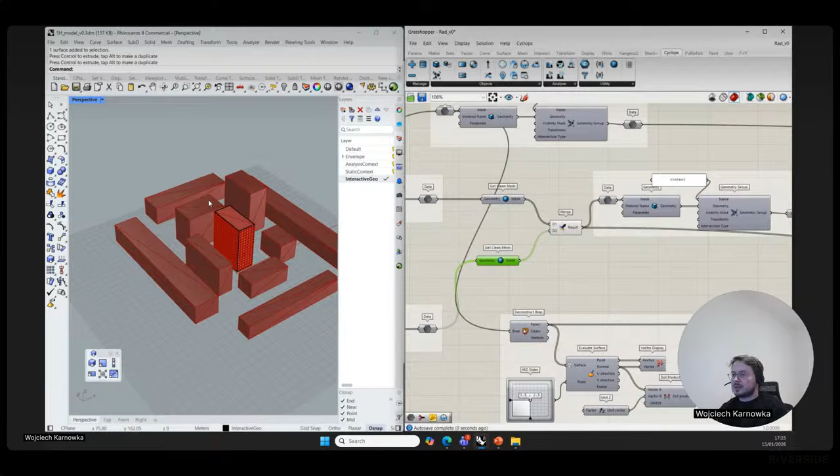We obviously also need the analysis points. Perfect. With the only difference that I am still using, as previously, the sampling on the context, but this time we will be running the radiation actually on our active geometry. So let me just disconnect the sampling of the facade from the context and instead plug our mesh, right? So now you can see we're sampling the mesh, and we have our analysis points here on the interactive geometry. So as I change the geometry, the process reruns.

Okay, so let's see. So here is our shading mask, and perhaps we can see how one would visualize the shading mask maybe in a second. But first, let's just try and fill the rest. So for the radiation analysis, we're going to need the shading masks. So again, you would expect here as many shading masks as you have analysis points. We had 646, and the sky series can be directly plugged. Let's in a second visualize what those shading masks mean. But for now, just to finish this part, let's visualize the cumulative radiation.

So again, the visualization pipeline is quite simple. We just take the panels, and we can directly just plug them as they are. But actually, the parameters that we visualize by will be something like bounds from the domain, start, and end. But now let's use something appropriate for radiation. So we obviously have it reversed now, so we want actually the red to be where the radiation is high. So just to make it simple, I would just reverse the start, right? So we have our domain ranging from 400 to about 1,000 kilowatt hours per square meter, and we visualize it quite easily. Okay, perfect.

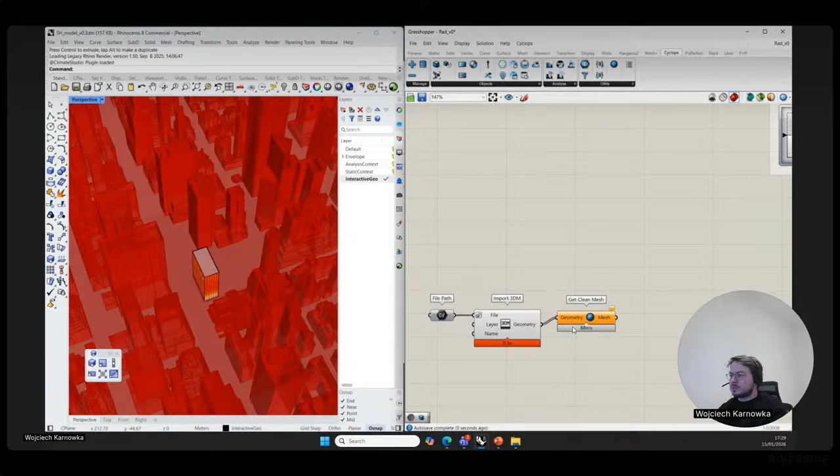So it's a good habit to have, just to use the get clean mesh component that we started with. This model might not be very clean. There were a lot of meshes cut and removed, so there might be some zero area triangles and so on. So for the purposes of this exercise, I can just ignore the warning for some missing or invalid meshes, and instead I can just join the mesh. Okay, so let's visualize it and just use it as it is. Right now, it's a fairly big mesh. It's 400,000 faces, just slightly over that. So let's see how our models will perform now.

We know that if we're inputting a large and complex context, we only have to do it once because we're taking advantage of this add object to scene method, right? So let's start with that. I will obviously need to pass it here. So instead of using our reference context, we can just maybe visualize right away, and I will just pause the analysis.

So yes. So if I now plug the geometry directly, okay, we can see that the geometry is now in the document, and it's already probably here in the scene. It is added here to the scene. It took just 90 milliseconds, and now I can run the same analysis.

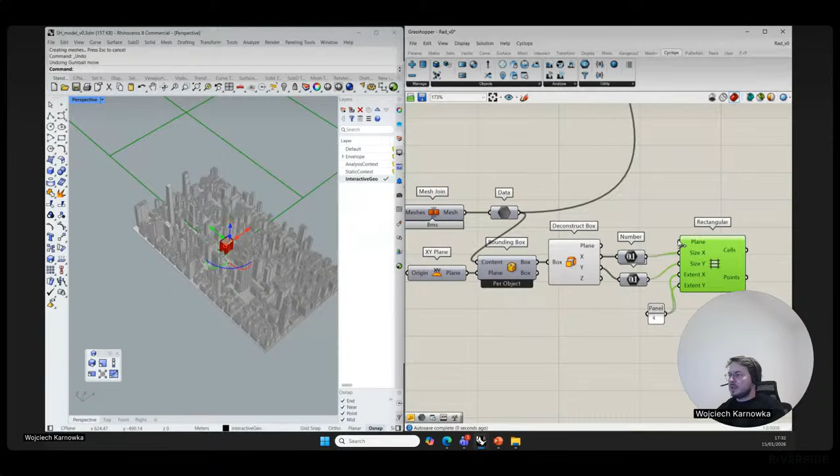I just want to show that we could potentially take this kind of already large model. We could again use the domain, just to understand what is the size of our bounding box, and now we can copy it a couple more times. So if I just take one of these components, a rectangular grid of this size, and let's not go too far, but if we just have 16 of those, that should give us some preview. So now I could just use move component and use the flatten points.

So I would expect the copying actually takes a little bit of time, but let's see if we can get this geometry in. Okay, so it will obviously be much better if I join this mesh. And then I have actually realized that the reason why it's taking quite a lot of time is because I'm using this custom preview component, and it would be much better if I just used, I think, mesh color.

Okay. So here we go. Let's see what happens. I might have gone a little bit too far with the 16 versions of it, but let's see. Okay, perfect. So you can see that now it took quite a bit longer, but the geometry is now in the scene, and maybe we can preview it. Oh, so this is my bad because I joined the mesh. It's actually invalid, so I might have to just send them separately.

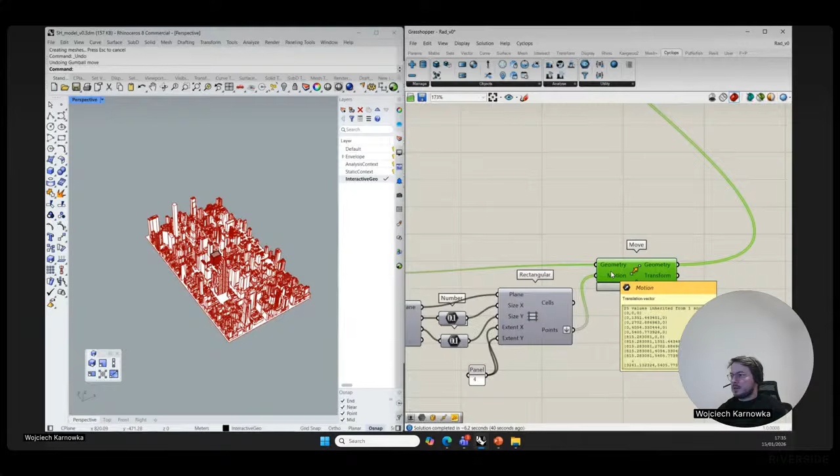Apologies. Yeah, okay. So now, since we're just visualizing the mesh colors, we cannot obviously see the shading right away, but you can see that the... okay. I might be doing something wrong here. Just 1 second, just to debug this. I'm not sure if this is something to do with how this mesh gets mutated after it's moved, but once it's moved, it seems to be made invalid. Just give it another try. I'm not too sure why on this multiplication the mesh gets broken for this fragment of the city.

But for the purposes of this exercise, let's stick with the mesh here and the preview. Once running this radiation, even with about 400,000 meshes, the model still remains smooth. I don't know if there's anything else that we could show here, Oscar. I could potentially go through the shading mask visualization, unless you want to go through this with your next example.

I think on your test there, just as a quick test, see if you can plug in your invalid mesh into the get clean mesh component, just to see what happens. Yeah, let's just make it a bit smaller, just to see what's going on. It might take a bit of time now because it's trying to clean up the mesh. Maybe it doesn't work. There we go. Okay, perfect. Thanks, Oscar. That's great. So let's see if we can just run this analysis, and there we go.

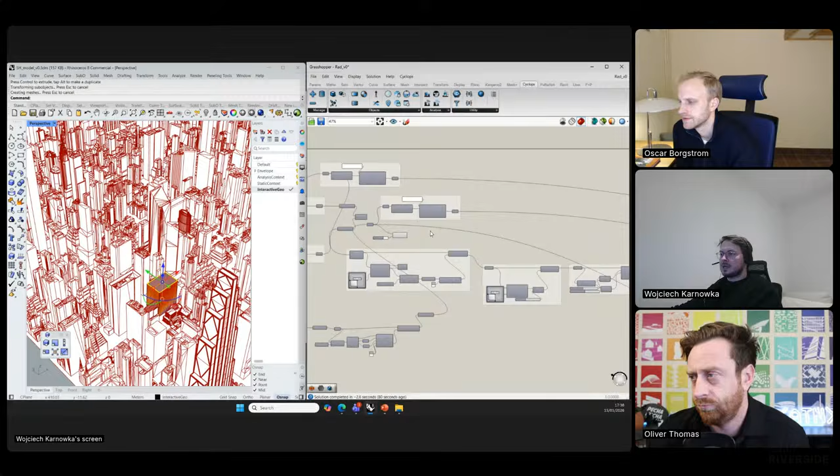I guess you can briefly talk about the fact that you can actually input the transform straight to the geometry group instead. Okay, right. Yeah. So the geometry group component also has this idea of the transforms. So you can see that here I really wanted just to show how do we copy the geometry, just to show how much of it can we actually input.

But quite often, if we're dealing with something like trees or cars or buildings that are just being repeated, similarly like in rendering, we use instances. So we could in Cyclops. So right now, if we just came back to the previous example, we could actually, I believe, use the same points, but instead now of moving the actual geometry, we could use this transform list to actually transform the content directly in the geometry group. And that process would then be much faster.

And again, the preview of the mesh will take most time, but you can see that in case you have some repetitive geometry, you can just make use of these transforms, which is in an intuitive way exactly like instancing of geometry in your rendering software. If you use Rhino a lot, you can very much see the geometry group as a block, right? If you create a block, you copy the block around, you're not going to create new geometry, you just create another instance with the transform. Yep. Okay.

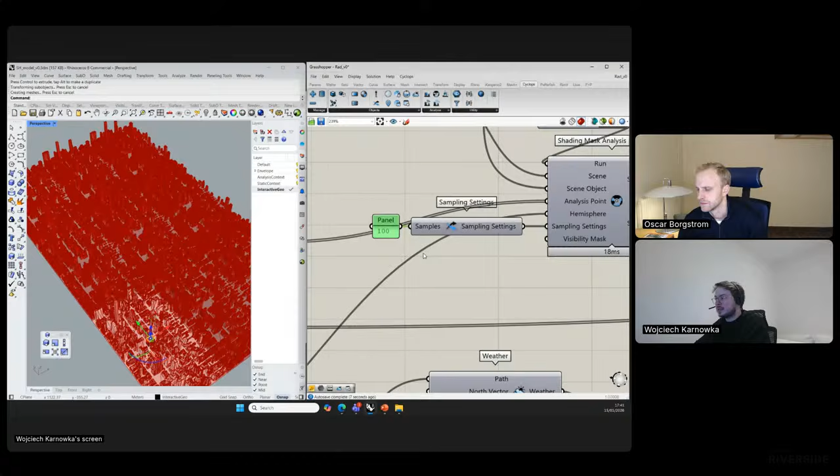Okay, so the number of samples here specifies the side length of the grid within which the randomly sampled rays are cast, right? So if we, for example, plug in 100, the actual number of rays cast will be 10,000. In this instance, we're only interested in the direct irradiance, so we shouldn't really set the bounces, as we're not really interested in the interaction between, for example, the materials and their properties or the transparency of objects. Yeah.

Cool. Okay. Any questions we should pick up? Yeah, there's not so many questions, more compliments. People are saying this is going to be super useful, particularly on massive urban projects. People are going to be jumping into this over the weekend.

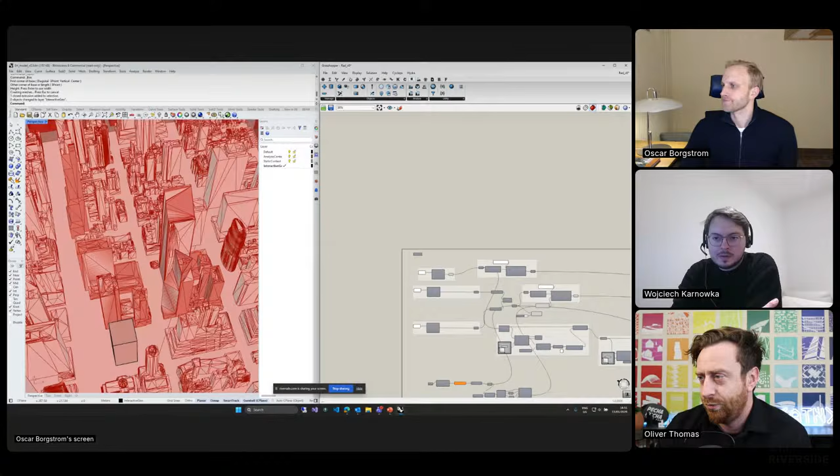So now we will jump into some daylight. It will get a little bit more complicated. I'm just setting up my screens here. Because now we start talking about sampling even more and materials and some things like that.

But I'm here again starting from the script that Wojciech had. We might as well keep this context, I think. There's no point in going back to the boring old cubes. But we can maybe remove this unnecessary copy that was just for illustration. So I'll remove that. I'll remove this display because I think Wojciech already created a display down here.

Okay, and I don't remember what shortcut he had for this. So Control M, preview mesh edges. You don't need to do that. Okay, this was a bit dark. So let's see. Okay, so we have the interactive geometry. Now we're going to run a daylight analysis. I'm going to run it on kind of a floor plate. So we're going to use a horizontal subdivision instead of a vertical.

We're keeping this. Actually, we can just delete these layers. Yes to all. We don't need this stuff anymore. As Wojciech said before, this join is really just for visualization in Rhino, and from Grasshopper into Rhino it's always much faster when you have fewer instances of meshes. So it can be quite efficient to join them. Okay, so we have the context and we have our interactive geometry.

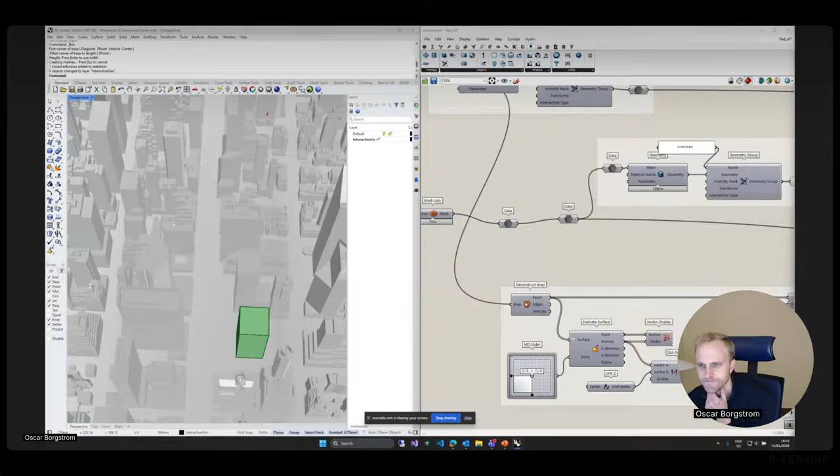Now let's start with creating some kind of, I don't know, some kind of floor plate here. Right? Okay. So first, we basically will want to create windows on the facade of this. So I'll take the, let's see, how should we do this? Okay, we can create a floor that we can kind of move up and down. Maybe that's the easiest actually.

Okay, I'll just create a bounding box here. This thing, that's my geometry, right? Maybe I'll just move all of this stuff down a bit because now they're working in the top here. Okay. Create the bounding box, and then we deconstruct that box. Okay, we get the Z properties of that, and we'll basically try and divide this into floor plates, to floors. Okay, so we plug this in here.

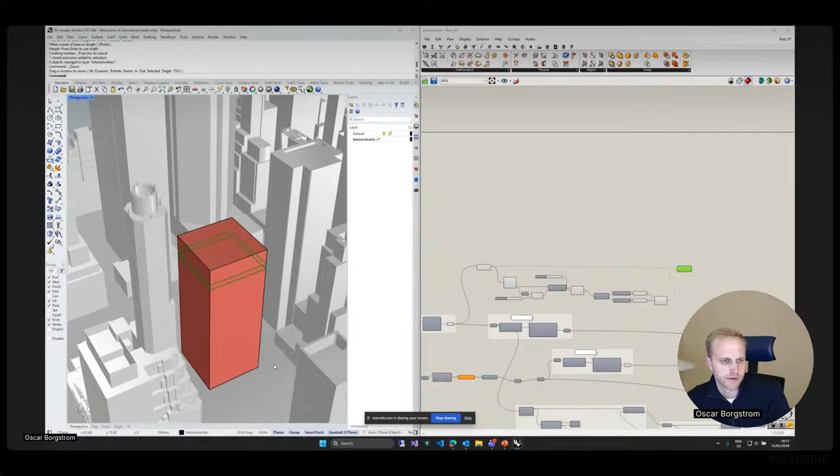I'm not gonna really create any complex walls or anything inside. I think we just subdivide the facade and then create a floor and a ceiling. Okay, so let's do boundary surface first. That will be our floor and our ceiling. And actually from that we can just get the floor here, and then we'll basically turn it into a mesh, and then we'll use the center point of the mesh faces as our analysis points.

So basically similar like before. And actually I can probably copy this, right? I plug in my surface here. I say how big do I want the voxels to be. Right, here it's 4 and 4 meters. Let's do 1 and 1. Let's see what we get.

That will give us 2025 samples. Okay. Actually, I'm gonna go in here, hide that, preview off, preview on. Control M. It was, yeah, Control M. Okay. Zoom into that. So that's kind of our analysis points.

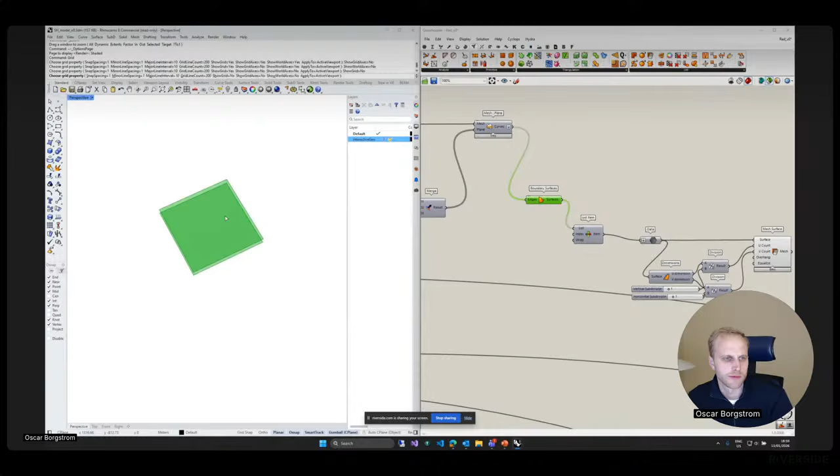Here, again, if we're going to use these surfaces as our ceiling and our floor. Actually, let me do this. If we're going to use these surfaces as our ceiling and our floor, then we need to move our, sorry, I'm just hiding the grid as well. We need to move, obviously, the analysis points, right? This mesh, just like Wojciech said about the facade, we need to move this up a little bit so that it doesn't intersect with the bottom. Is there an overhang? Yes, that's not what I want.

You see that this mesh is not actually exactly on the surface edge. Maybe it's because we have a V count and a U count. Or no, probably not. Someone might be able to answer why this happens in the comments.

Anyway, so we have our mesh, and we want to move this slightly instead. I think depending on the daylight analysis that you're running, you obviously want to do it at different heights, right? If you're doing whatever certification, there might be a requirement of the height. I'm just going to do it 0.1 meters above the floor. Okay. So we have moved that up, good.

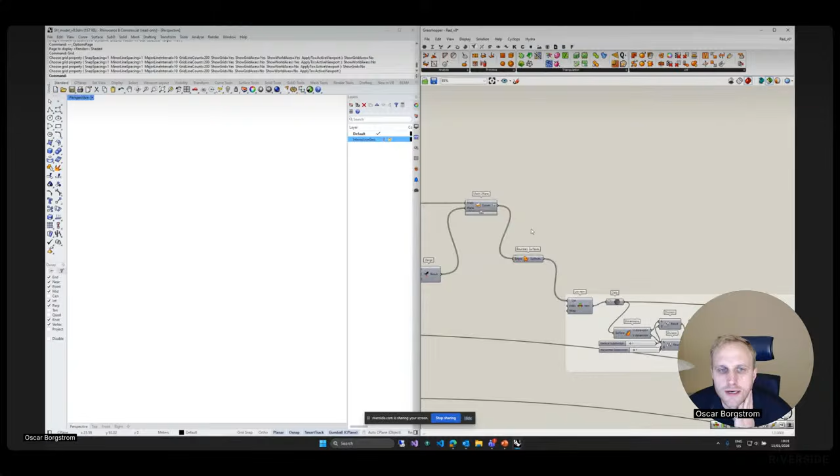Then we need to create some kind of facade. And let's do this. Let's explode this curve. I'm just gonna do this super simply. Okay, maybe, is this gonna help us maybe? Yes. Okay, so we have our segments. I'm just gonna divide curve. We can plug in just a number there so we can control that. 100 is not reasonable. Okay.

Create the polyline out of these. Okay, this gives us a polyline, and then we explode that polyline to get the segments. And basically what I'm going to do now is make every other one a window and every other one opaque. Okay. So what we can do first is loft this, and we have, yeah, let's simplify. Okay, so we have first 0 and 1, which is obviously the bottom and the top curve, and then we have 0, 1, 2, 3, 4. Why do we have 0, 1, 2, 3, 4?

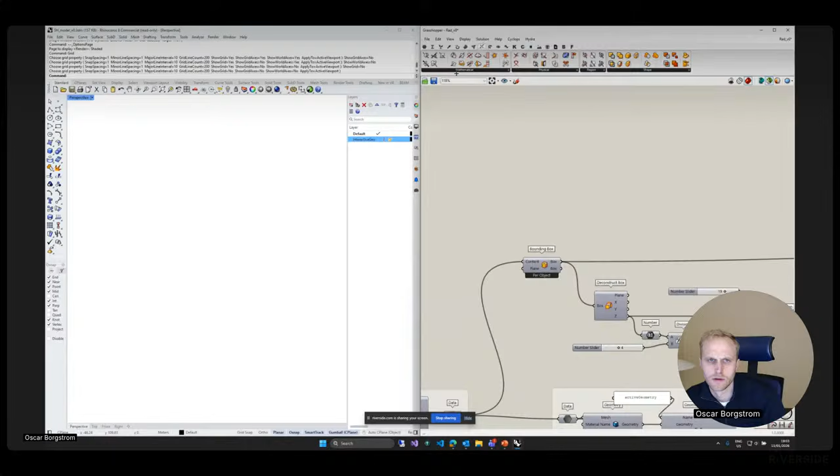Okay, instead of intersecting the mesh, I'm gonna intersect the Brep. Now we hopefully get a cleaner curve. Yes. And now we only have 0, 1, 2, 3. Because I was a bit confused there that we had 5 segments. Now we have 4 segments. Okay. Create the polyline. We have the segments there per polyline.

And now if I use the shift, right? So divide that here. Okay. Now we have basically 2 lists with 76 segments in each, right? The segments for the bottom and the segments for the top. I can use flip matrix here. So now we have instead 76 branches and 2 lines in each, and we just loft these. Okay. So here we have our panels.

And then I flatten this, not reverse. And then I'm gonna cull pattern on this. And plug in a toggle and a toggle. And a merge. Okay, so now we're gonna get this pattern of every other. And then we can do a not on that. Basically reverses the booleans. Run this again. Right, so then we get the ones above. And so we'll use one of these to basically apply glazing material. We use one of these to apply an opaque material, and then we get a closed facade. Okay.

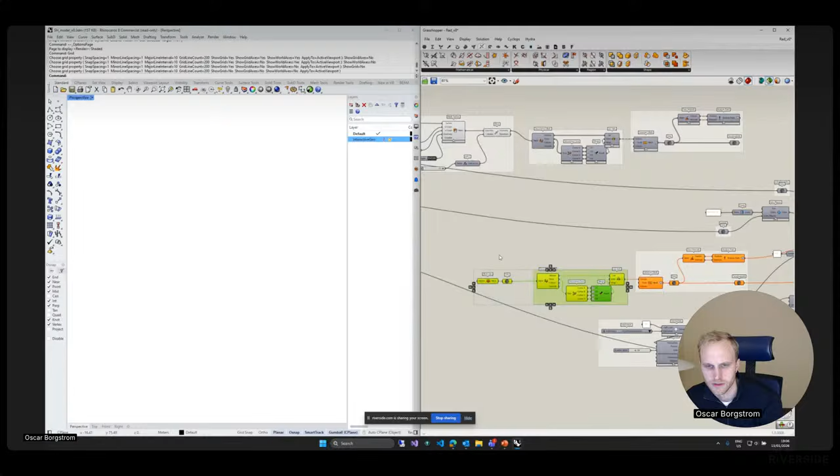Let's rename this one to floor panels. So what else do we need? We're gonna need the kind of tower geometry, right? The option geometry that is not within, like we don't want to cover the opaque floor plate. We don't want to cover the facade of the floor.

Okay, we have these. This is the outline of our floor plate. We don't want to have this geometry in the scene, but we want to have the geometry above that floor plate and below that floor plate. And I guess a quick and dirty way to do that is to do, should we do this clean? No. Let's do it dirty. Trim solid. Okay. That's not what you should be using usually, but I'm going to use it here.

So that's my shape. I'm going to create, just see if this works, bounding box on these curves. There we go. That's the geometry above and below, which we still want to keep in the scene, obviously, because a ray might bounce on a neighboring building and then bounce on this facade and then go into the sky. As an example.

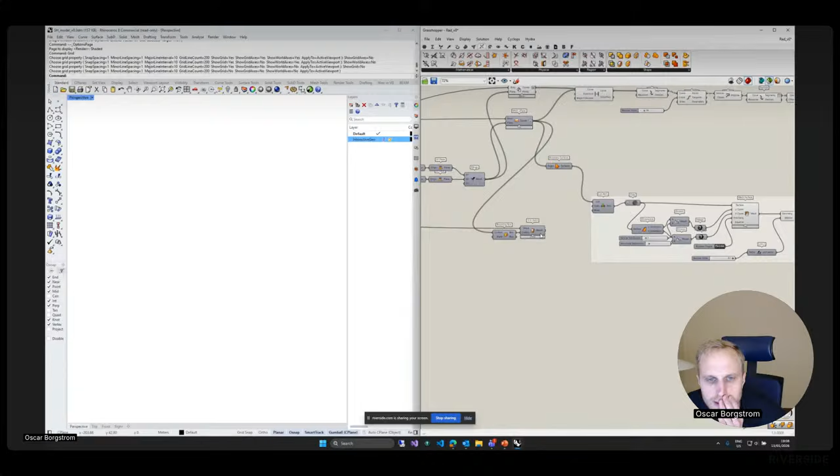So preview off, and now we have to start thinking. Okay, this we don't need. Now we have to start thinking what should have what material, right? What should be dark, what should be bright, what should be transparent, and so on. So first off, for the context, we can create a new material. So I just write material here.

Okay, and now this is quite similar to the Radiance materials, right? So there is plastic, metal, mirror, glass. There's also volumetric, which we maybe don't have in Radiance, and emissive, which we don't have in Radiance. But these 4 are very similar to what you have in Radiance. And if you've used Ladybug Tools, this is maybe what you're used to.

There's also material from Radiance, and this takes a string, like a Radiance material string, right? A Radiance material is described by a string, basically, and converts it into a Cyclops material. So if you already have a workflow which uses Radiance and that material definition, you can convert it very easily into Cyclops.

Okay, but I will create a new material here, and we will create a plastic one. We will not really care about specularity and roughness for now, but we'll then change the reflectance by changing the base colors. This is color based, so you don't plug in just a value for reflection. You actually need to plug in a color. So if you're used to defining reflection using 0 to 1, you can do color

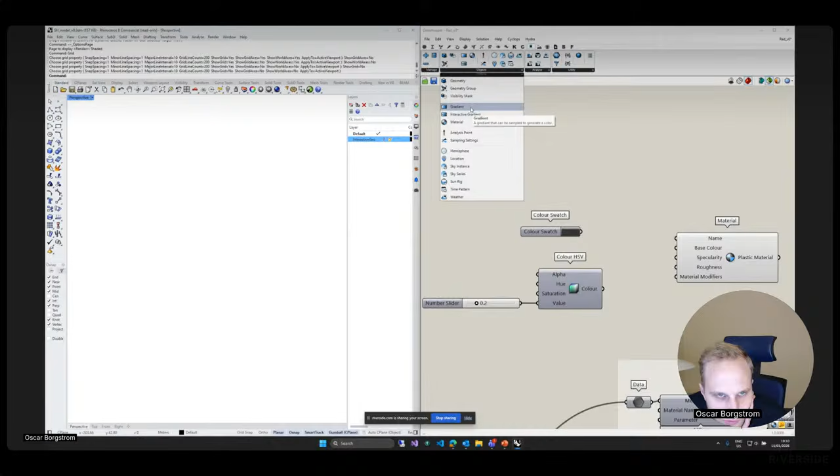So you can create gradients using Cyclops. You can either use this, which is very similar to the native gradient component, but this then outputs a gradient object. Okay. Or you can create a gradient manually from parameters, change the interpolation, color space, and so on. This is used to display data on the hemisphere mesh, but it can also be used as an input onto a material.

And I don't know how applicable it actually is in the analysis in this case, but basically what you can do is, I could do a swatch. Okay, so I could do white and black. Okay, so then I say 0 and 1. Okay, and then we merge these. Sorry, so black and white. That's the parameters. No, sorry, that's the colors. And the parameters are 0 and 1. Okay.

Okay, so now we have created a gradient instead of a solid color. So if I now input the gradient as a base color, this is a gradient-based material now, meaning that you can use the thing we call a parameter on the geometry to choose where in this gradient I should put the color. That basically means that the color sampling happens on the GPU instead of happening when you create the material.

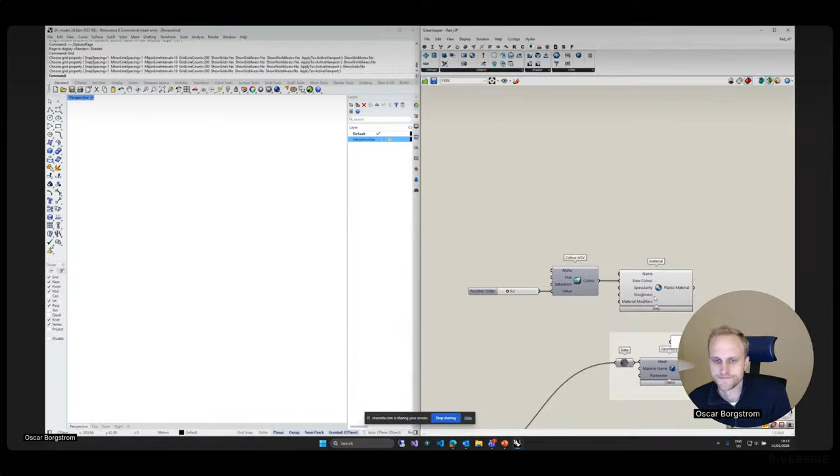So maybe we can just call this context materials. Okay. So now we plug that name here. So again, names are very important. The material is a separate object, which also needs to be added to the scene, or to the analysis if you're not using a scene. And the way you apply a material onto a geometry is that you specify the material name that you want the geometry to use. Right, so here I've named the material. I also need to plug in the same name for the geometry, right?

So now my New York context is using the material called context material. I can hover the geometry output here. You can see that in the description it says geometry, vertices, faces, and then it says MAT, which is the material name. But we also then need to add the material to the scene. Okay, so actually, we can just create all the materials kind of in a group. That might be the easiest way to do this.

Okay, so we have our context material. We know it has these settings. Then we maybe have our floor material. Let's say that has reflectance of 0.4. We might have a ceiling. Let's call it ceiling wall material, and we can set that to 0.6. Okay. So now we have 3 different materials. And I'll just copy this one down. And then we have another material, which will be the glazing. Now it needs to be a glass material and not the plastic material. On this we define a transmittance instead of reflection or base color like we do on the plastic.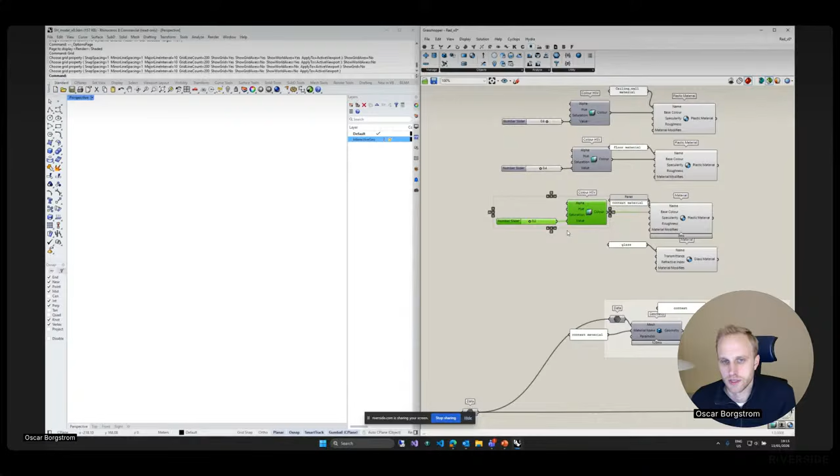Okay, so let's call this glass. Plug that into name. Transmittance, again, you can use this to create a transmittance if you don't want to use a swatch. So we can say now it's 0.2 transmittance. Maybe that's a bit conservative. Let's put that to 0.7. Here you can change refractive index as well if that would be relevant, but in this case it's just glass, so we don't need to do that.

So now we have all our materials, and we just merge this, and we group this. Okay, and then we can call this static scene objects. And there we input the materials, we input the context, right? Because these things will be in the scene always. Let's add that here, and let's flatten that output. Okay, so we added our materials and we added our context, and we've defined that the context should use the context material.

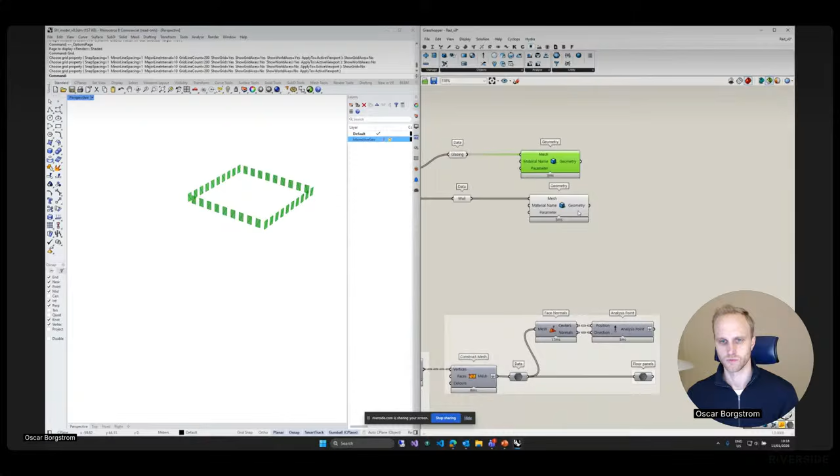Okay, let's turn off the display for a bit. Now we can start converting our geometry that we have up here. So let's create geometry for each of these. Let's say that this is the windows or glazing. And then here we have the wall. Sorry, the W on my keyboard is a bit slow. Glazing, wall. You see that I don't necessarily have to turn these into meshes, right? They will be meshed when they come in here. So in the case of these simple things, I usually just plug them straight in.

And this is exterior. And the glazing is using what material name? It is using the glass material. And then the wall and ceiling is using the ceiling and wall material. So we have wall, and then I see that we haven't actually created anything for ceiling and floor yet, which are here. So first we had the floor, and then we had the ceiling.

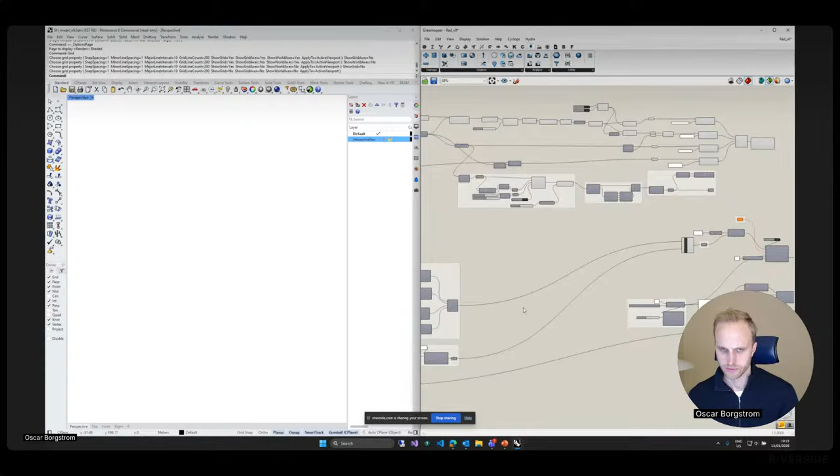Okay, we need to name this and make sure we're not using the same name as anything else. So here we have a context, and then we can name this. Let's just name it option. Okay, and as before, the context is not going to change very often. The material properties are maybe not going to change very often. So I just plug these into add objects, and then this one will be dynamic, right? Because we might change the option or change the floor there as we were doing. Can delete this.

Okay, this then also needs the analysis points, which are here. Okay, so that's now created the 1700 shading masks for the floor plate. Now that was very fast because we're using direct sampling here, meaning that none of these shading masks should actually have any shading or any relationship to the sky because there is geometry in the way pretty much all the way around. Okay, so then we can instead create another type of sampling setting. So you can do this custom, and this is quite good if you want to.

So these settings, they are similar to the ones you will use in Radiance. And if you're comparing the results of Climate Studio with Cyclops or of Radiance, I saw there was a question about that from Craig, or if you're comparing to Ladybug or Honeybee and Radiance, it's very important that these settings are the same, because if you just change the depth from 3 to 6, it will completely change the results that you get out of Honeybee, that you get out of Climate Studio, and it's obviously the same here, right? So you need to really make sure that the depth and the sampling is similar or exactly the same if you want to be comparing apples to apples.

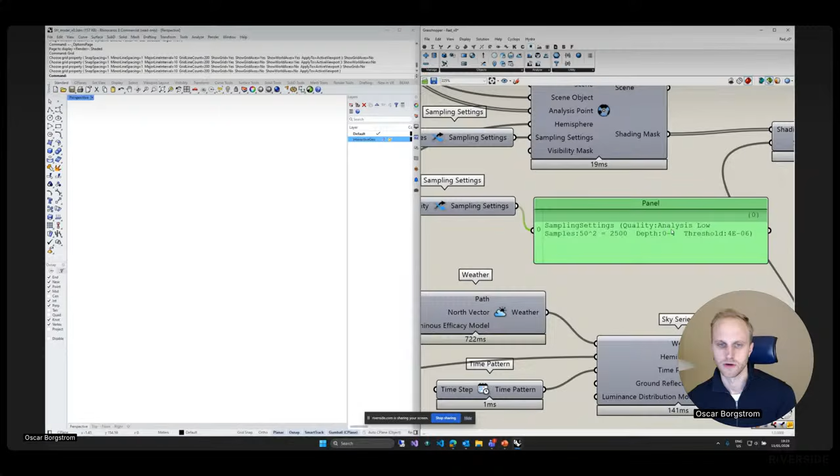Anyway, for this use case here, we'll just create sampling settings, and we'll use the preset analysis settings. And this is kind of a short way to just get specific analysis quality. Right, so there's such a long description here, I'll plug it in here. You see, if I set it to analysis quality low, then the samples will be 2,500. We will be bouncing 4 times, and the threshold for the Russian roulette termination is 4E-06. You can read more about the sampling settings in the documentation if you want to.

But let's see. So because we're using shading masks, because we already have this description of the relationship between the analysis point and the sky, we can reuse that description, or shading mask, for a lot of other analyses within the same workflow. And really the heavy lifting is the shading mask, right? That's where we're doing all the ray tracing to understand the impact of a specific patch onto the analysis point.

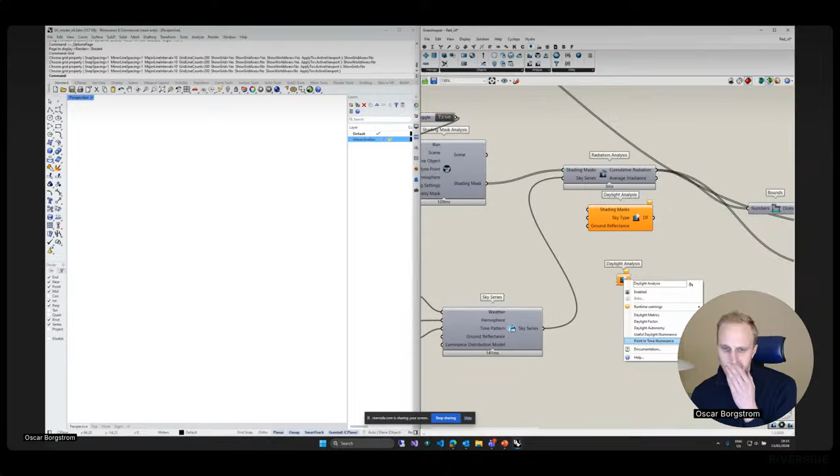So if I drop down any daylight analysis here, if we look at daylight factor, you can see it takes a shading mask input. If we look at UDI, takes a shading mask, and the UDI also takes a sky series, obviously, because that is weather specific. The daylight factor is not weather specific. But all of these, I just plug in my shading mask, and in this case, my sky series.

And now, obviously, it asks for an illuminance interval for the UDI. So I'll just plug in, I think it's usually 300 to 2000, if I remember correctly. Okay, that one was a bit slower. But yeah, what's happening in these components is basically an enormous matrix multiplication of the sky data for each patch and the shading factor for each patch, right? So let's see if we can create some more visualizations here. Let's use the daylight factor, and we can use another preset for that.

Okay, that doesn't really make sense. Sky type, generate missing enum, standard overcast sky. Just preview off on these. This. Maybe display. Let's just display the glazing and the wall here. So I'm just going to display the glazing and the wall in separate colors just to understand what is what.

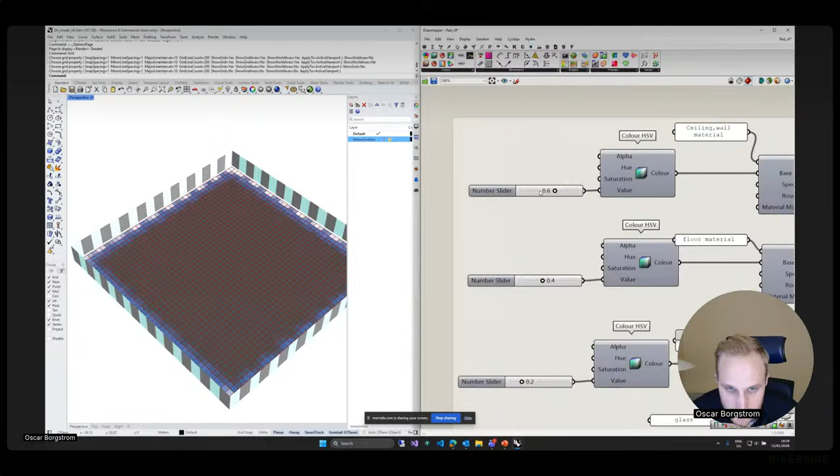Context material. Let's just see what happens if we change the glazing here. Okay, maybe the ceiling can be 0.8 just to liven this up. Let's give it a high bounce. Still not super. Hemisphere. This is strange. Okay, I mean, maybe this is actually a fairly normal value.

Just to make it a bit more colorful, I'll try and be a bit more optimistic in our materials. That doesn't seem to be affecting. Let's see. But the glazing is affecting. I guess my floor plate isn't great. Let's see what happens if I turn on this.

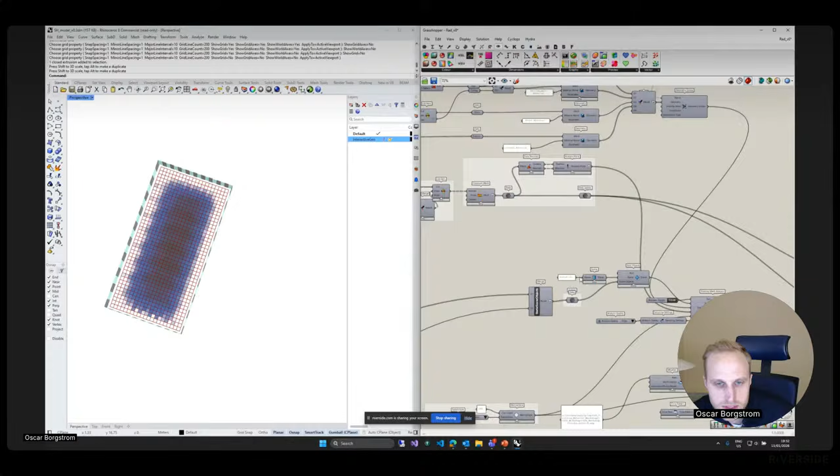So it's good to be wary when you're using scenes, when you're not running all the geometry straight into the analysis component. You really need to be wary of what you've added and what you removed. And if you run into something weird, if I just select this and enable, this component reruns. And it will basically flush out anything and just add the objects that you currently have plugged into the different components. Yeah, now our daylight factor looks a little bit more optimistic.

And let's see if we can just display the context here as well. Yeah, you can obviously do the other ones here, like if I want to display UDI, maybe we can just copy these, to just see them. So this deconstruct domain, start and end. Okay, and this is the parameter.

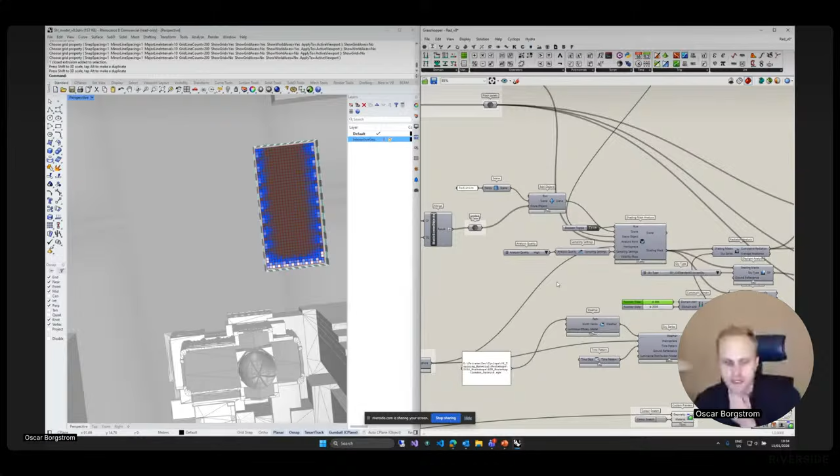Okay, I hope that's kind of clear how you set this up. I think so. Just to reiterate, if you're comparing, it's good to make sure that your sampling settings are the same. And then obviously make sure that your material properties are also the same.

Yeah, okay, maybe some display we can do just to show. So if I drop the hemisphere and I use the hemisphere mesh, which basically creates the mesh, and we can give that a scale. I don't know where we are in size here. Oh, obviously we need to input the hemisphere as well. Sorry. This is the hemisphere we're using. Okay, that's a bit pink.

But then, for example, we can take the sky series, right? This contains a lot of data because it's basically data now for every point in time, every hour of the year for all the weather that we measured. So I can take the sky series, I can use the get property value, and then I can get the different skies. This would be one sky per hour, right? Because that's one sky per sample in our time pattern.

I can also get the cumulative sky, which would basically be the total amount, the cumulative data within a single cell. That gives me a sky with 145 cells. I can then use this again, get property value, right? Because this is another object. I can then get luminance from that sky.

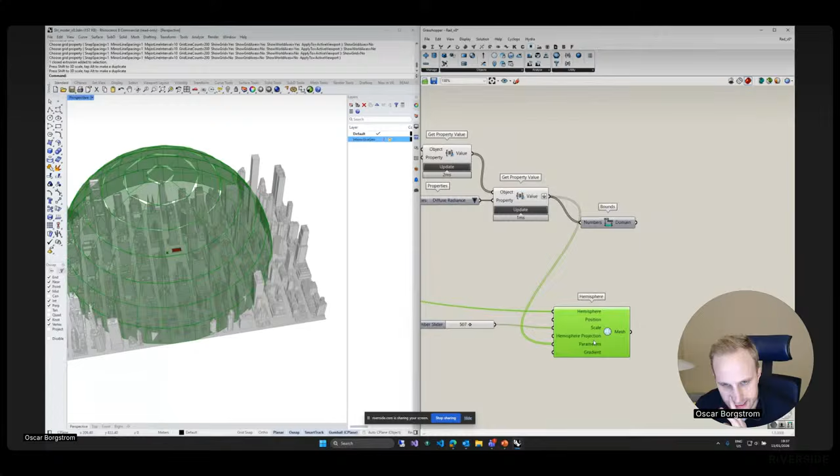So now I can basically use those values as parameters, right? Because I have a hemisphere here with 145 cells, and here I have a sky based on the same hemisphere with 145 cells. So it's a value for each cell. I use that as my parameters. And then this will also need a gradient, right? Because it doesn't know yet which colors.

So I create the gradient. Now this needs a Cyclops type gradient. And this component here creates an interactive gradient, but using a domain as an input. So I can use this domain here as the input to my gradient. I can use a preset, maybe green to red, and I plug that into gradient. And now we can see the cumulative data on the sky. Basically using the hemisphere, we can also see the direct cumulative data, right? So this would be for the sun as it moves over the sky.

And if maybe I just disable this for now. Oh, I can just do that actually. We can just plug in a higher value here just to see some prettier sky subdivision. Okay, so now we have 512 patches, or maybe just do like 1,000 patches. And now we're starting to see the impact of our sampling, right? Because this is the direct radiation or direct irradiance from each patch.

And you can see because we sample just once per hour, it kind of becomes a bit spread out. Obviously the sun is also going to be here, right? It's just that it's moving this way and we're only checking once per hour. Meaning that it might be beneficial to use more time steps per hour instead of just one.

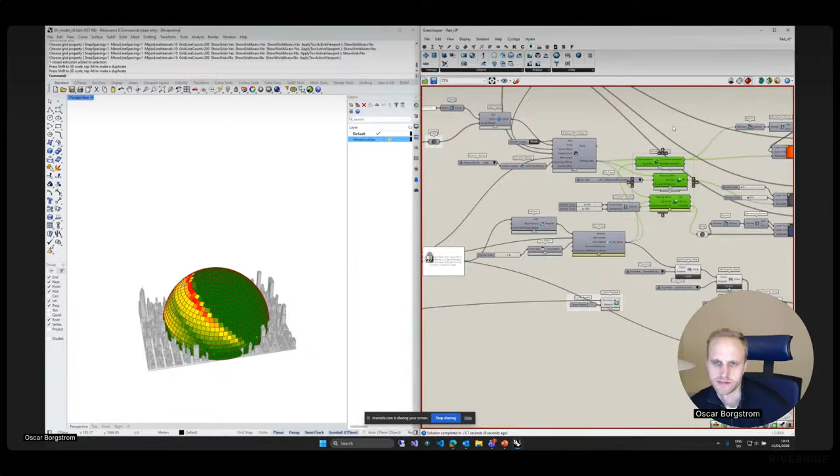You can look at the diffuse. Yeah. On the hemisphere, you can display data that's also related to the shading mask. So if I turn this on again, no, this might be a bit slow. Sorry. If I lock the solver, I'm going to disable this just for now.

Okay. So now we're creating a hemisphere, right? With 1,000 patches for each shading mask. So if I take a list item here, and just to visualize also which analysis point, like which shading mask we're looking at, we can do this. I'm gonna just take a point, set one point, set that here. Position. Okay, so we move that out of the way.

Okay. So for the point that is here, right? That is the first point, the first shading mask in this list. I can get the shading factors, right? And this will be the multiplier for each patch in the sky. So you see now we have a list of numbers here, which are the multipliers for each patch. And that obviously then takes into account all the materials and the ray tracing we've done in order to evaluate that relationship.

And then again, we can get the bounds. Are we getting the bounds here actually? Just do this then. Number, so that's the number. And then we plug in the shading factors here instead. Now this can be a bit confusing, but anyway, now we're looking at the shading mask for that specific point. Okay, so I guess these very red patches would then be where the windows are in relation to that point, right?

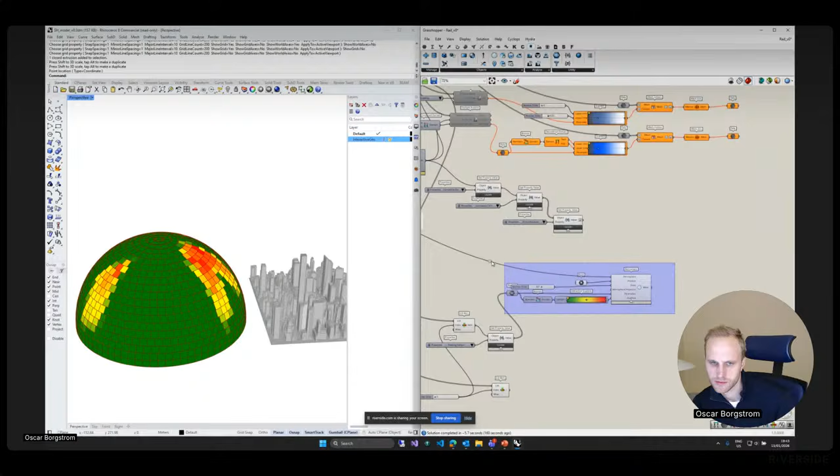Okay, maybe Wojciech and Ollie can come in here and see if you have any questions or any comments on what I'm going through. I think this is pretty clear, Oscar. I'm trying to think if there's something we haven't covered, but I think you guys have covered a lot of stuff. There's loads for people to go back and rewatch and jump into. There are some more technical questions, which are quite interesting.

When you're using the gradient, someone's asking, is gradient likely to be used to simulate a gradient glass frit? Could you use it for that? I guess you could, yes, but you would have to create a lot of geometry. But in theory, you could. Let's see if I can do this. How do I do this? Okay, I'm just gonna model this manually because that's gonna be easy. So imagine this is my window. Okay, that's my window.

So then in theory, you could create a subdivision like this, right? I know I can do this in Grasshopper, but now I'm just doing it manually. Oh no, there was one as well. Oh no, that's the center. Yeah, sorry. Okay, let's just say that this is my geometry.

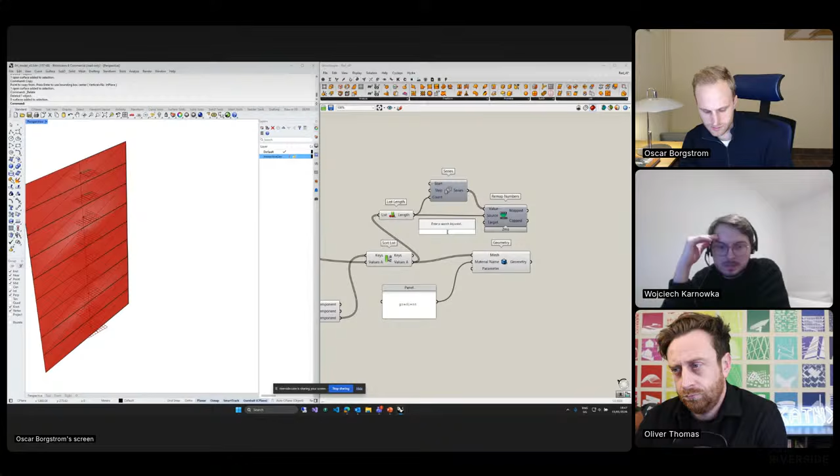Okay, so that's the name of the material, and then let's do a series count. Sorry, list length. Yeah, okay. Count. We can keep those values, it doesn't matter. Oh, no, I'm just gonna remap. Okay, so now I have numbers. I think there's a simpler way to do this. Now I have numbers 0 to 1, so that can be my parameters. So now each mesh has a parameter of 0 to 1.

So now I create the material, which is glass. No, we named it gradient material. Name, and then I create the gradient. In theory, I could do this manually, or with the interactive one. I set this to white and black. Let's say the ones that have the parameter 0 get a black color. The ones that have the parameter 1 get a white color, meaning fully transparent. The domain is already set to 0 to 1. This goes into transmittance because transmittance is the gradient input.

That should be it. Nice. I hope that's clear. I'm not going to test it now, but this should in theory produce a gradient of less transparent to more transparent glazing. Yeah, I think that's great. You've covered a lot. There's little bits and bobs, but people are saying thank you. They're gonna come back over the videos and slowly go through it.